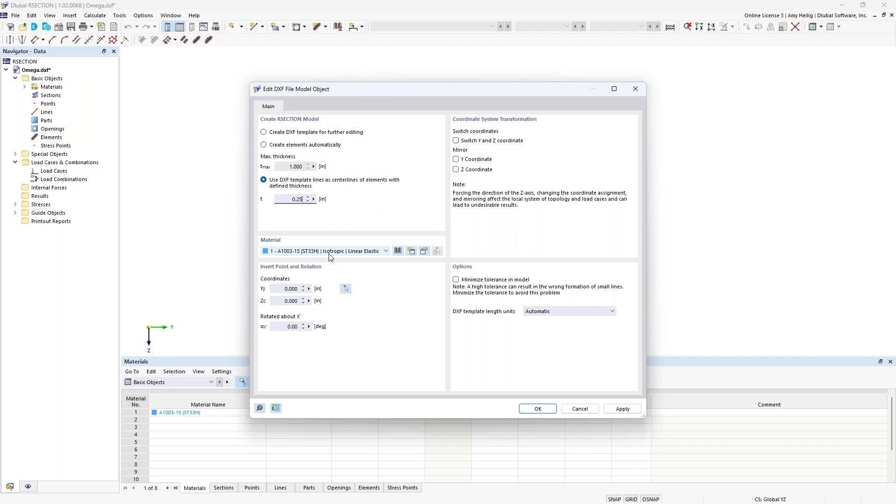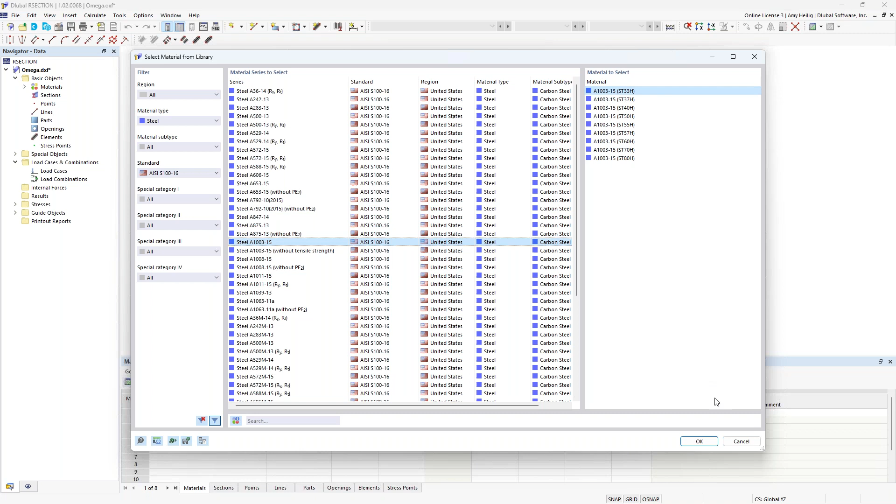We can visit our material library, and over on the left, we have the filters to utilize the steel dropdown and then the AISI S100. So here are all of the available materials for cold form steel. And notice that as we click through these different options, there are several subcategories as well. For this particular cross section, we'll go ahead and utilize the A1003-15 and the subcategory here of ST33H. So that material will then be set within this dropdown, and we can go ahead and click OK.

So once the import is done, we actually see everything automatically generated for this custom cross section. Now, I did want to point out that these are completely straight elements. We get a little bit better performance with the finite strip method with cold form steel sections when we just model directly these straight elements. It is possible to also model arcs at these corners where the elements join, but just know that the calculation time will be increased because of that. So ideally, it would be best to keep these as straight segments.

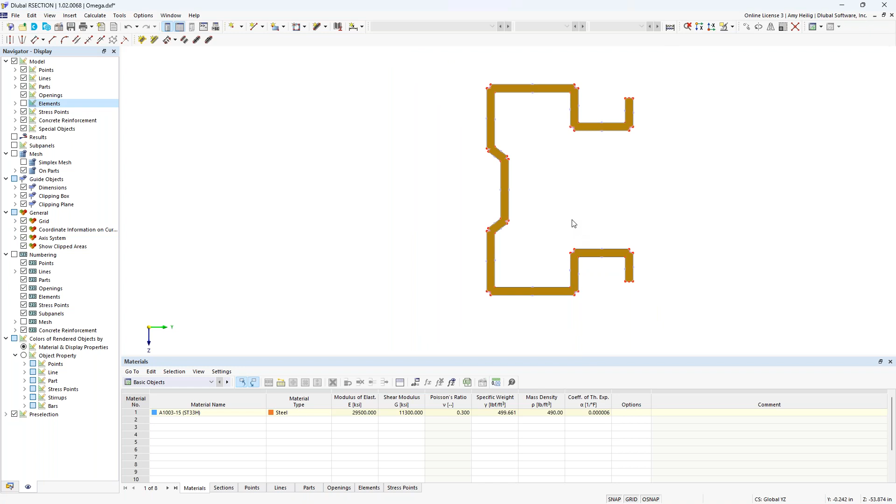Now, looking at the custom cross section here, we have a couple of elements that, again, were automatically generated. We'll start off with what we call the part. And the part is automatically created between the exterior boundary lines here of the cross section. Then on top of that, we have what we call the elements. And each one of these segments here is comprised of an element.

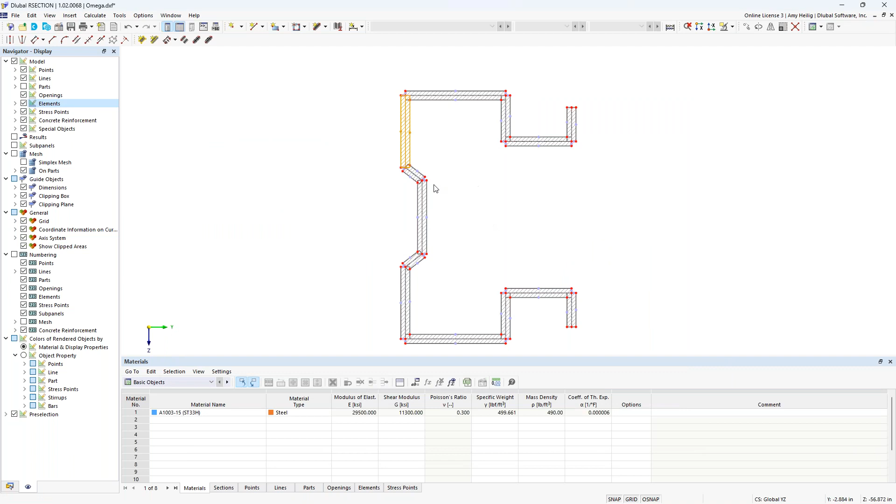We can right click to edit the element. And what you'll see here is that each of these has a particular thickness assigned to it as well as a length. And this information is important for the thin wall analysis and is required. So we would need both the parts and the elements.

So going back to the navigator here, I'm going to right click on the model name to access the base data. There are two analysis methods. The finite element analysis is set here by default, but this would be more so used for massive cross sections. Instead, we want to modify this to a thin-walled analysis.

Additionally, under the manufacturing type, we can set this to cold form. This will just be helpful once we bring this cross-section into RFEM that this data will already be set. When we click OK, we can simply go to calculate, calculate all, and immediately we'll see here that the cross-section properties are presented to us in table format.

So we have the area, for example, the moment of inertia, the section modulus, and this is the information that needs to be transferred to RFEM in order to understand the cross-section properties here of this section. Additionally, you'll notice the unit stresses are given here based on a 1 kip applied load, for example, for axial forces or maybe a bending moment. We can also view those stresses with the 1 kip foot applied to this cross-section.

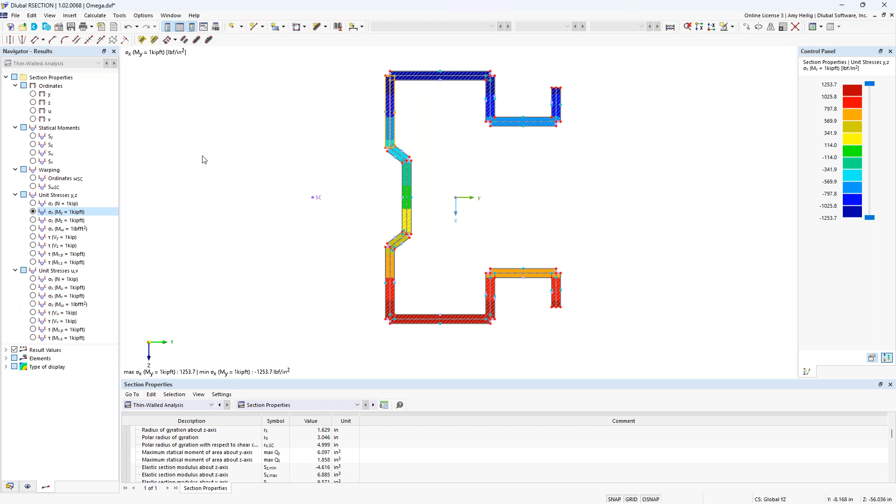So once we have the cross-section properties, we do want to save this to our computer. So in order to integrate in RFEM, we do have to have these saved cross-section properties from the calculation as well. And we will jump over to RFEM.

So beginning our cold form steel structure today, when we create a new model, we would give it a model name. The type of model would be set to 3D. And under this second tab, this is where we have our optional add-ons. So RFEM is the base program, and it's responsible for the modeling, the loading. We can integrate with BIM software, and it can run the full static analysis. So this means deformations, internal forces, support reactions. But if we want to take this a step further to actually carry out the design according to the AISI or the CSA S136, then we need to activate here the steel design add-on.

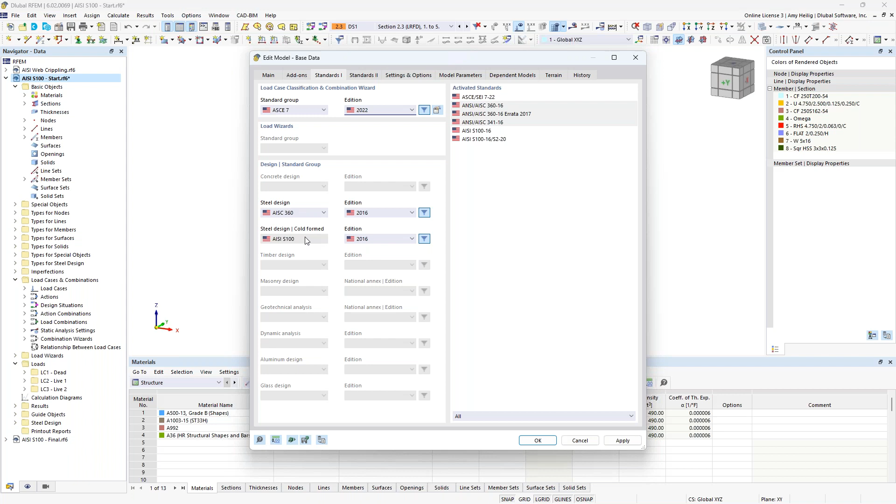Now under this third tab, this is where we set our standards. So we can see that we will generate our load combinations automatically according to the ASCE 7. We also have here the NBC. We have implemented the latest standard according to the 2022 for those load combinations. Then because the steel design add-on is active, we see here the AISC 360 is set for hot rolled steel, and we have the AISI set for cold form. Now, alternatively, if we were doing design in Canada, we could set this to the CSA S16, and we'll see the cold form update here to the CSA S136.

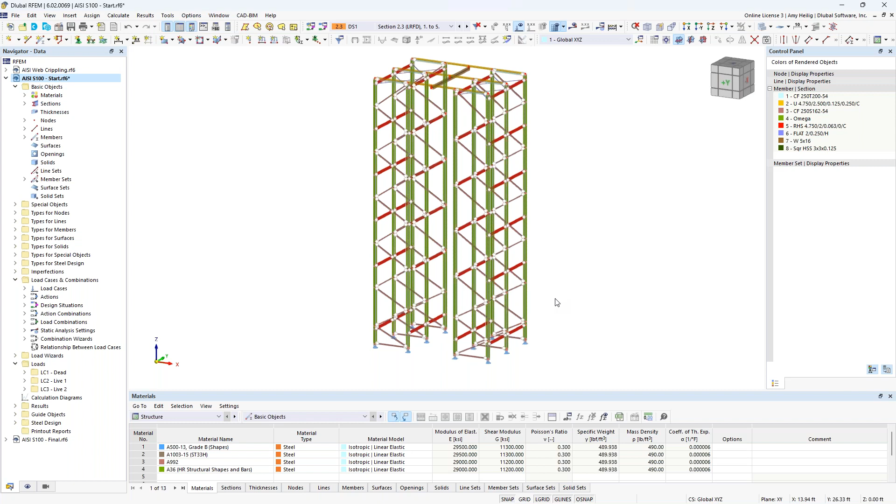So once this information is input, you can see here that for the sake of time, I have gone ahead and modeled our entire structure here. So this is some type of racking system maybe used for automatic storage and retrieval. Now we do have other webinars, tutorials that are dedicated to new users in the program where you can learn how to draw a beam, how to apply supports. So for the sake of time, again, we'll go ahead and just do a quick model review.

So over on the left in the navigator, we have here our various cross sections. So if I edit these cross sections so we can take a closer look, we'll see here the cold form steel sections applied to this particular model. So we have some channel sections, additional channel sections with stiffeners, and that custom cross section here was also brought in from RSECTION.

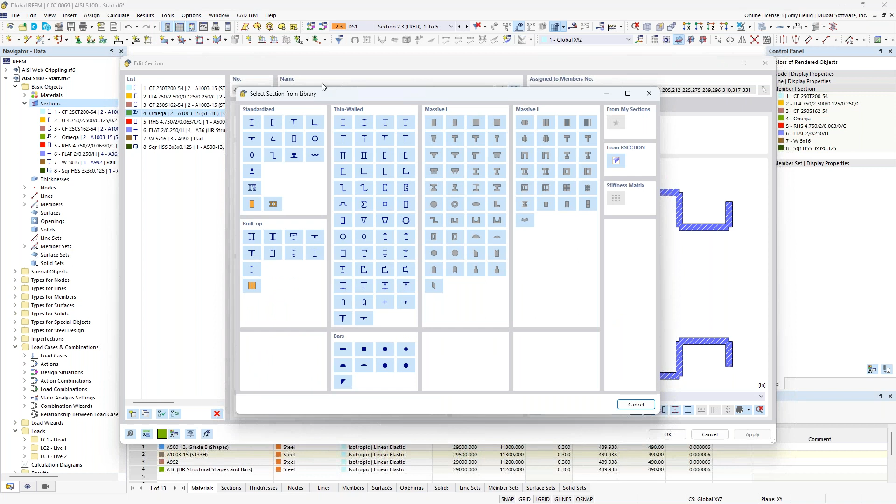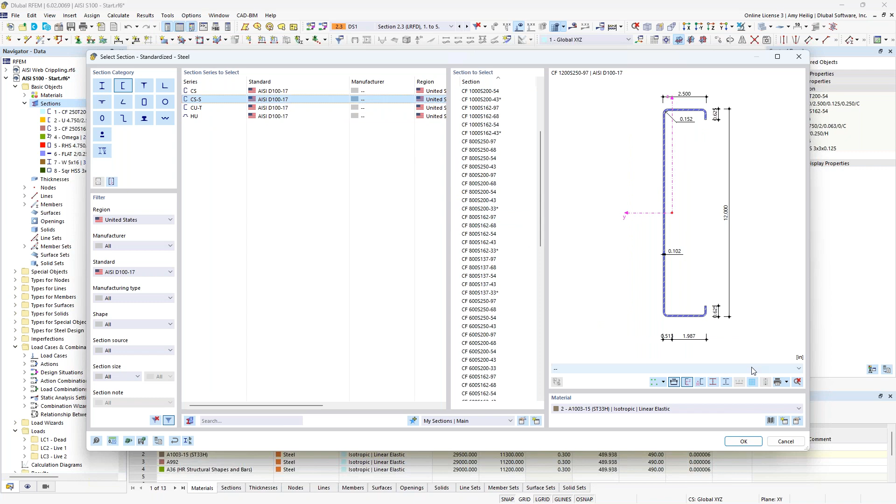When we look at our library database for our cross sections, if you want to choose a standardized section directly from the AISI, for example, if we take a look here at our channels, we'll utilize the filters once again on the left to filter to the United States, as well as the AISI D100, and we see the various channel cross sections, including hat cross sections, available to us here, again, directly from the AISI standard. Now, alternatively, if you have a parametric section that fits within the criteria listed here under thin-walled, you could simply input the dimensions and the custom cross-section properties will be automatically calculated in RFEM directly.

And then alternatively, we have the import here from RSECTION, and that's what we utilized for the shape here in the background. I just navigated once I clicked this option to that saved file from RSECTION on my computer, and we can bring this in like we would any other member.

So in addition to these cross sections, I have also assigned a material. So similar to our section, we can always visit the material database. Over on the left, we filter to steel, to the AISI, and once again, we have access to all of these various materials directly from the standard.

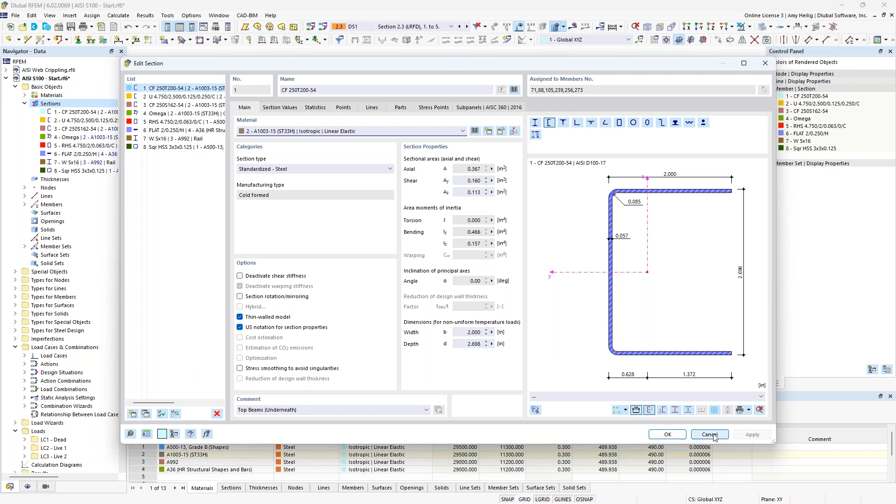So now that we have the cross sections and the materials covered here, we'll also see them within our navigator over on the left. When we take a look at that custom cross-section here for our column, and I'll zoom in, you'll notice that the program has actually rendered this true cross-section for me. And I'll go ahead and create a user-defined visibility here so we can see this in a bit more detail.

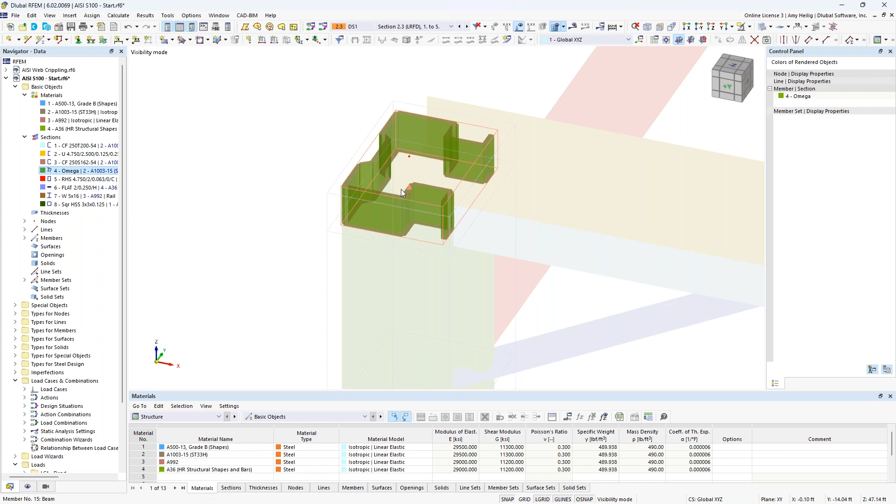So you'll also notice that for these columns, utilizing the custom cross-section, they were actually modeled in segments here. So each one of these is a separate segment. Now, there is possibility in the program to model this as one continuous column and just to keep this as one member and applying intermediate nodes along the length. But alternatively, if we do model this in separate segments, it's entirely possible to create what we call a member set. So we do this by selecting multiple segments.

We can right click, and under the members option, we have here what's called create member set. So that's what you'll notice here over in my navigator, that the program has grouped together these columns. And this will come into play a little bit later on with topics like notional loads, but also the design. Again, wanting to design this as one continuous member rather than those multiple segments.

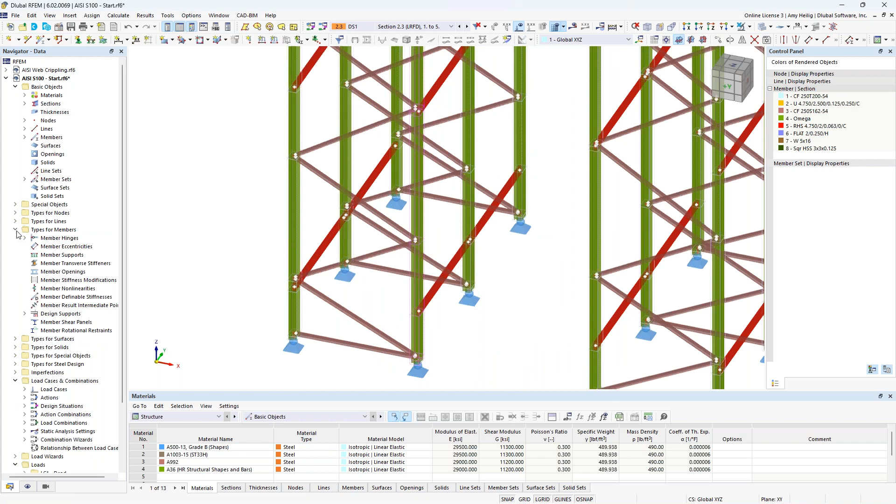You'll also see graphically the member hinges applied with the symbol shown at the member ends. So if we take a look at the types for members, we see here our various member hinges, and the member fixity all depends on how these cross sections or these members are connected to one another. So with cold form steel, it's quite typical to connect them with screws. And I have several different definitions here, just depending on what that connection is.

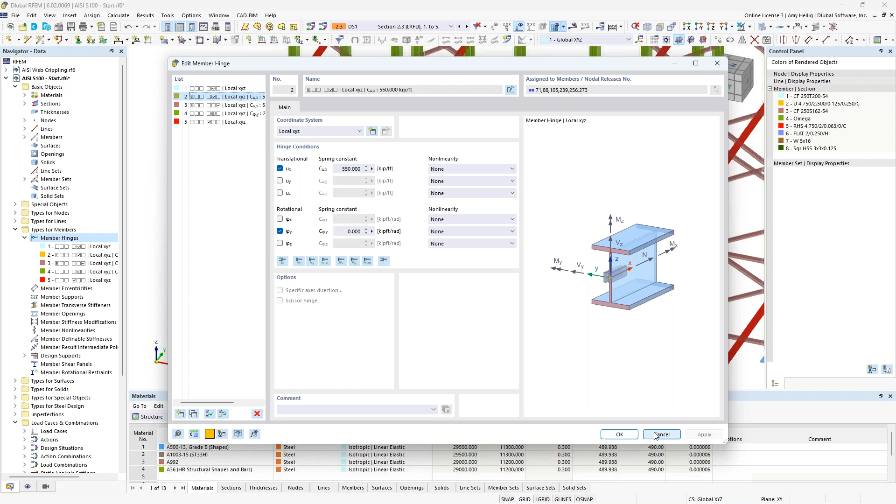So we have our 6 degrees of freedom. These are all based on the local axes of the member itself. You'll notice that for some of these, I've applied a spring constant. So something that's not fully fixed, not fully released, but somewhere in between. So within this model, we can take a look at the different hinges applied. They're probably a little difficult for you guys to see, but as I click through these, they are highlighted in the model depending on which member they are applied to.

And finally, we have our nodal supports down here at the bottom, which were applied just utilizing the tool up here in our toolbar. And these are also a bit special in the sense that initially they just look like standard pin connections, which you'll see under this definition type that we again have 6 degrees of freedom, but these are based on the global axes here, shown here in the background.

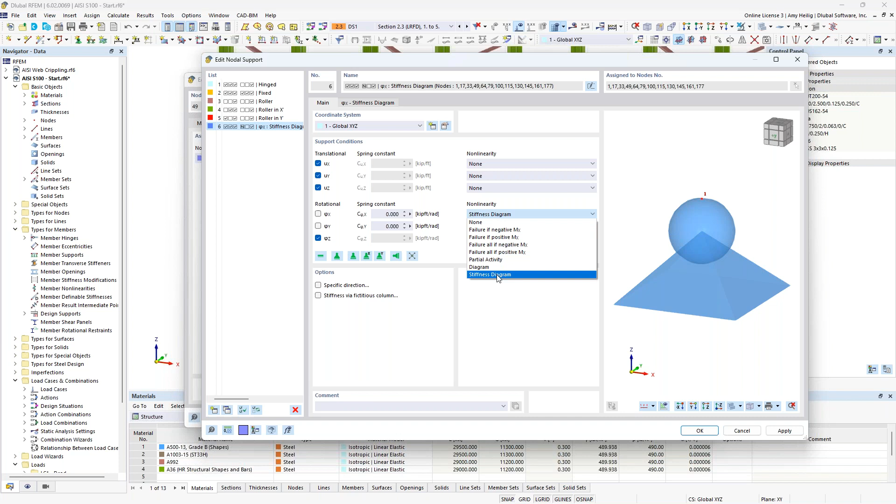So I've restrained the translation for this pin support, including the rotation about the global z-axis, but I've also applied a rotational nonlinearity. So this is within the rotation about the global x-axis, and under the nonlinearity options, I've applied a stiffness diagram. And we now get a new tab here where we can define this information. So you'll notice that I've set this so that the rotational stiffness is dependent on the contact pressure or the downward force for these nodal supports.

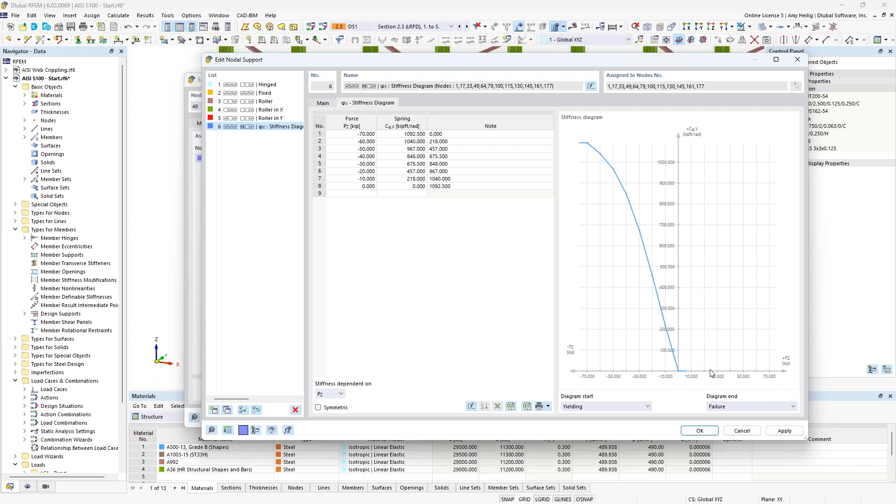So as the contact force increases here, we'll see a greater spring constant, and then in uplift, we'll see that support fully fail for rotation about the global x-axis. So entirely possible here to consider more complex scenarios for our nodal supports as well. So now that we have a basic understanding of the various members within the model as well as our supports, let us move on to loading.

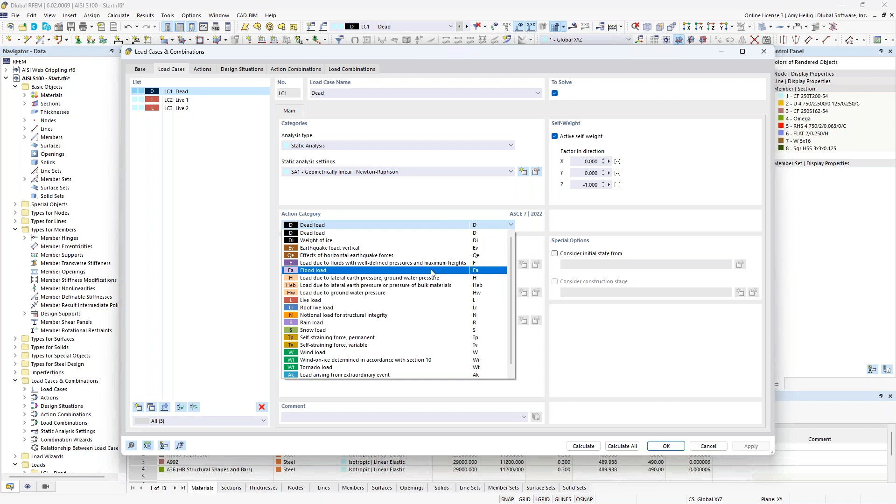So I have here 3 simple load cases that we can access in our load cases and combinations dialog box. So we have the first load case, which is dead load, and you'll notice that self weight is active here, and the action category is also set, which is just dependent on the ASCE 7, because remember back in the base data, this is the standard we're using to generate our load combinations. We can revisit that information here under our base tab, where we'll see the availability to change that standard if we'd like.

The second load case is a live load. So action category set to live, self weight is turned off here. And finally, another simple load case, live load 2 with the action category set to live. So once these load cases are set up, we would need to actually apply the loads to the structure. So we'll begin here with the display of our dead load. So you'll see that I actually didn't apply any additional loads to this load case. We're only accounting for self-weight automatically under the hood for that particular load case.

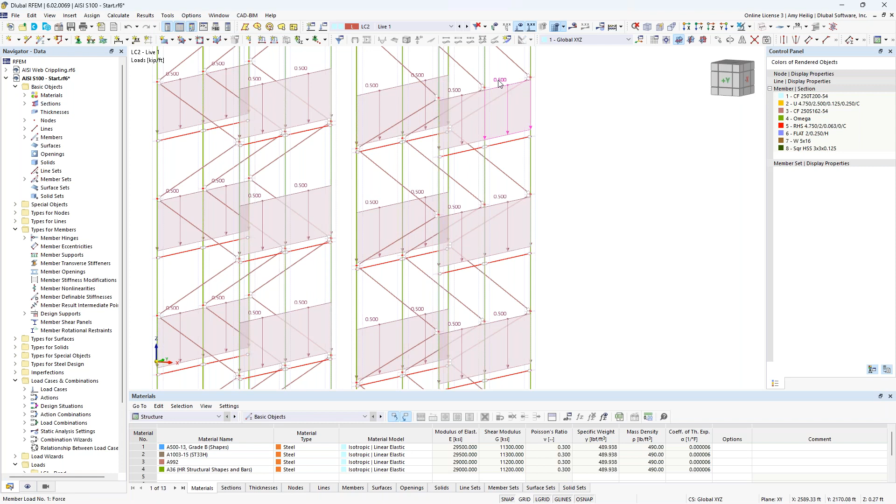Now looking at our live load 1, we see here, and I'll turn this into wireframe view, that we have the member load applied here at our beams, which are spanning between the columns. And a member load can be applied up here in the toolbar. But there is something a bit special about this particular member load. If I double click on it here, we'll see that it's just a standard downward uniform load of -0.5 kips per foot, but we have the ability to consider an eccentricity on the loading.

So when I turn this checkbox on, I get the additional tab up here at the top. Now the default behavior for a load is typically applied at the center of gravity or possibly the shear center. But alternatively, we can move that load application up here to the top center point so that perhaps we want to account for some additional torsion within the member for the design, or we can do so directly within the force eccentricity.

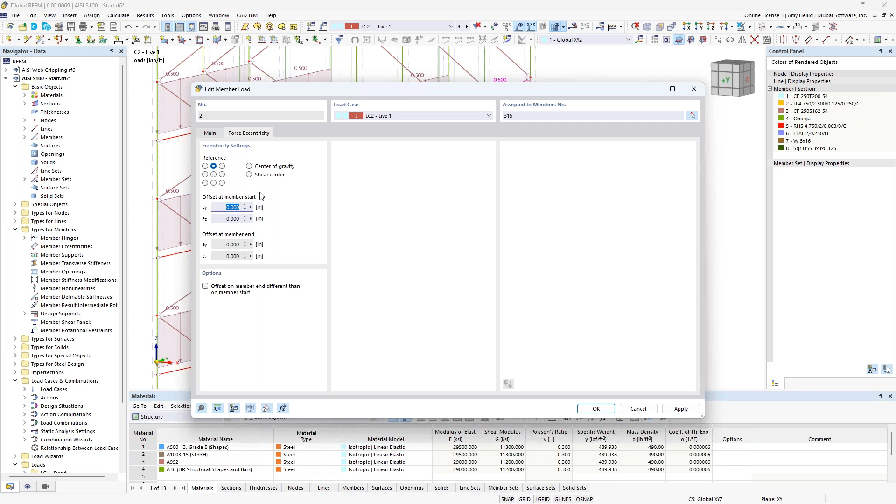So in addition to this first live load, we also have this second live load, and this is also a very simple application with a single nodal load applied up here to our center beam. So this load is just essentially introducing those horizontal forces to the entire racking structure. That nodal load can also be applied up here in our toolbar.

So going back to our load cases and combinations, now that we've generated those load cases, let's take a look at the design situations. So the program has automatically created 2 design situations for us, our LRFD design situation and ASD design situation. Again, these come directly from the ASCE 7, and it's nothing more than just grouping together our factored load combinations for the first design situation and our unfactored load combinations for the second design situation.

We can always click on this little info button here, which will pull that information directly from the standard of what we're referencing. Design situations are absolutely needed when it comes to carrying out the design within the steel design add-on that we activated. So that's why you'll notice that these are by default checked on here for that particular add-on.

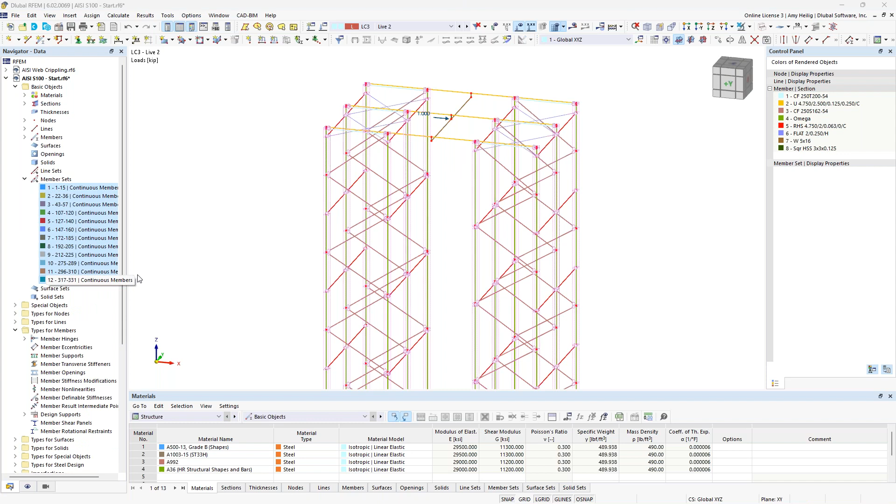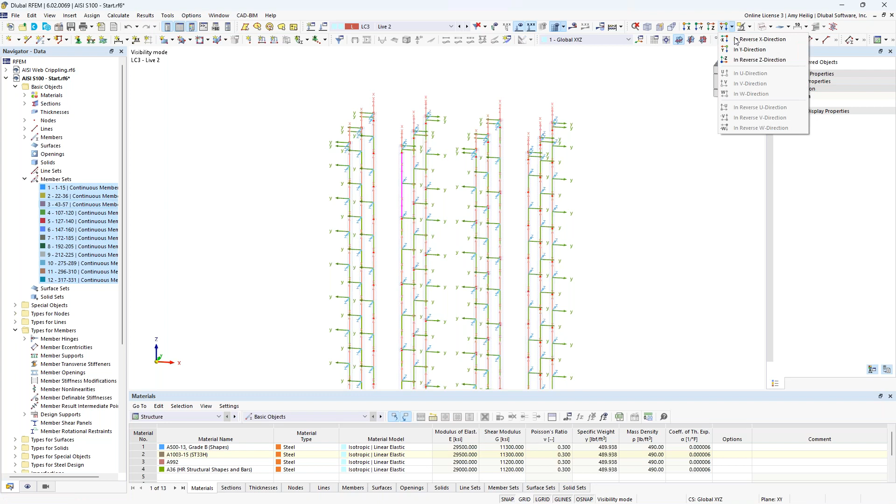So I'll begin by creating a user-defined view here for only my member sets. So we'll go up here to our toolbar and create that user-defined view. I'll go ahead and turn off the hidden objects in the background. Now, additionally, when we create our imperfections or our notional loads, these do depend on the local axis system. So if I right click, I can turn on the local axis system of all of these columns. So we'll take a look at the elevation view here.

Now, the imperfections are going to be available under our navigator here under the imperfections table. So we right click to create a new imperfection case. Now, again, the imperfection directions or the case all depends on which direction you want to apply them in your model.

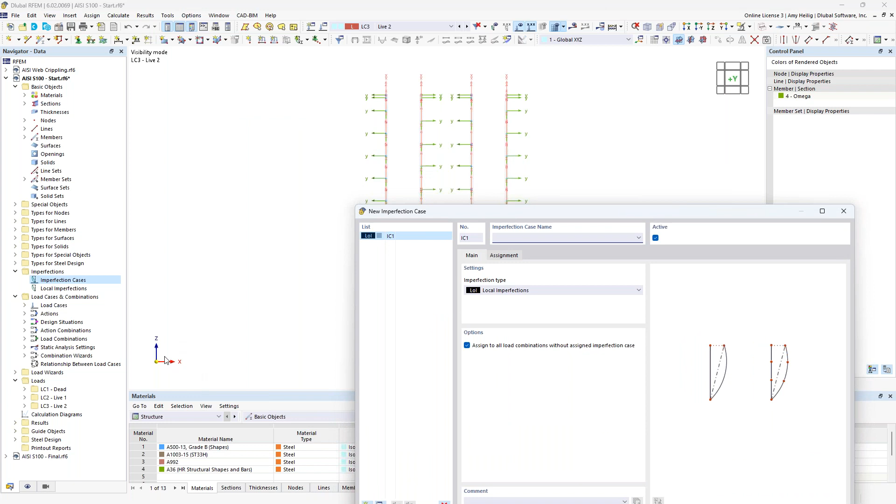For our case today, I'm going to create two simple imperfection cases, one in the global positive X direction and one in the global positive Y direction, or into the page here. Therefore, I need two imperfection cases. So we'll begin with imperfection in the X, and then I simply make a copy of this and I'll create my second case, imperfection in the Y.

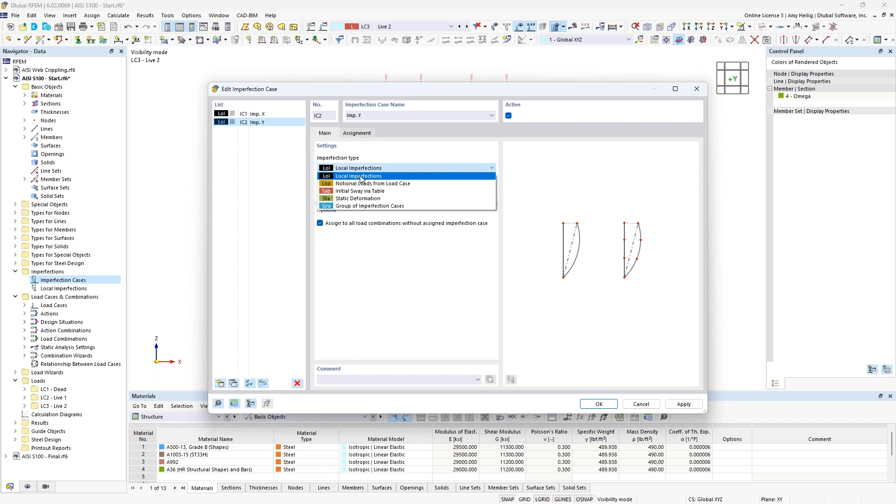Now, the imperfection type within this dropdown will be set to local imperfection. And under the assignment tab, there is the ability to assign specific imperfections or notional loads to specific load cases. Alternatively, though, we can just apply it to all of our load combinations, which is what we'll be doing today. So now that these imperfection cases are generated, we need to actually apply the notional loads to the structure. So now you'll see here under our imperfections folder these two imperfection cases.

Now we can apply according to each individual member, or we have the ability to apply to a member set. And because these columns are individual segments and I created member sets to group them together as one continuous member, we will want to right click here to create a new member set imperfection. So within this dialog box, we use our drop down to directly select the AISI S100. And this is going to reference equation C1.112-1 directly from the code. So this should look familiar if we look that up within the code.

So more or less, we are just applying a deflection here at the top of our columns, but the deflection magnitude all depends on the axial force applied to the member. So this is an iterative calculation that the program will automatically apply for us based on the axial forces under each load combination. The imperfection is applied according to the member's local axes.

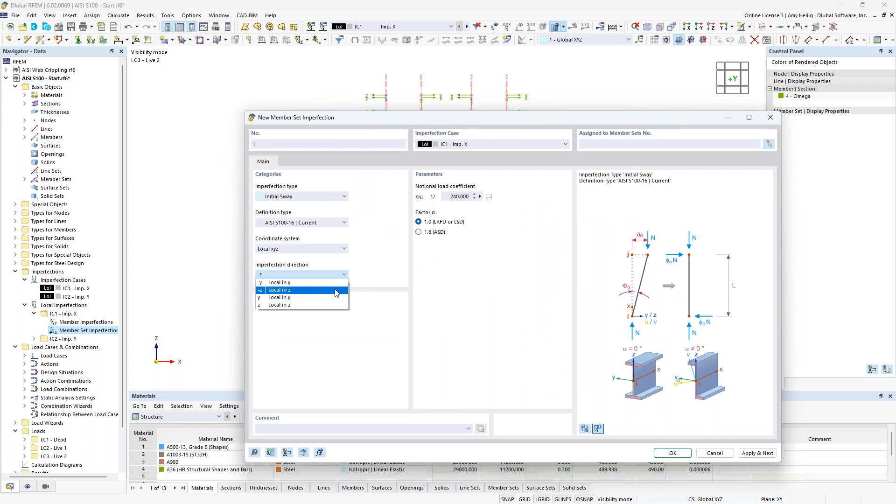So for our case today, this first imperfection in the X direction, we want to apply this based on the negative Y axes. And I'm going to select here my member sets in the first row and the third row. And we might be wondering, why are the local axes different here for the different member sets? That's because in rows 1 and 3, I have the members rotated at 90 degrees, and at rows 2 and 4, they're rotated at negative 90 degrees. So inevitably, this affects our local axes orientation, which is why we need to take a two-step approach here for the imperfection direction.

So now that I've applied it to those particular member sets, I can click Apply and Next to remain within this dialog box and simply modify my imperfection direction to the positive Y local axes. I'll select these graphically as rows 2 and 4. I click OK, and I click OK once again. Now, if we display our notional loads, or imperfections, we see that column out of plumbness applied, again, referencing the AISI, to our member sets or our columns directly.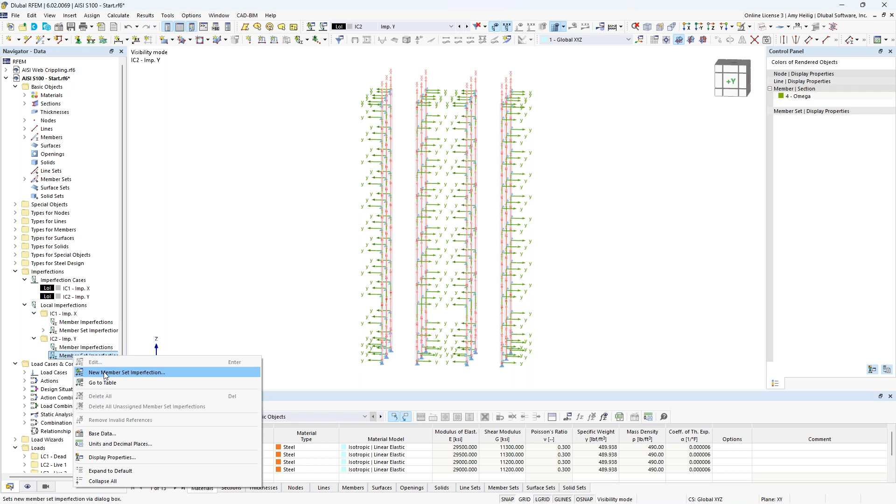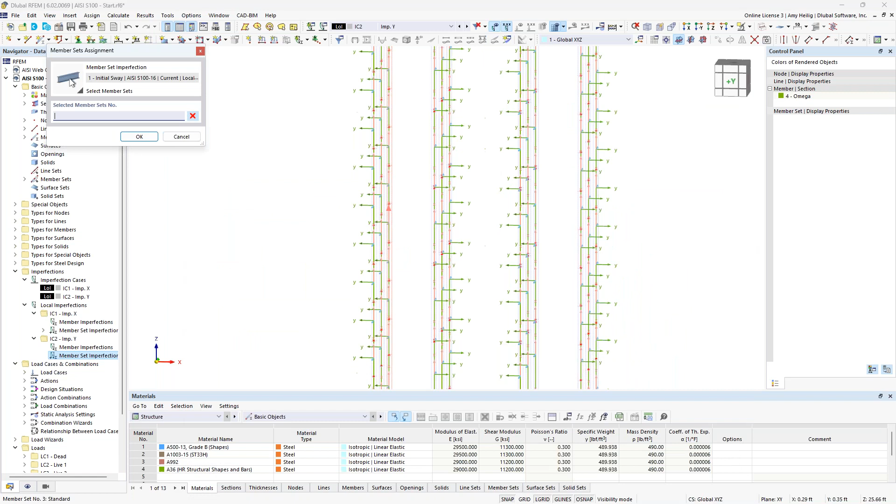We're going to do the exact same approach here for imperfections in the Y direction. So we go back to our navigator to right click to create a new member set imperfection, this time under the imperfection Y case. We'll select the definition type directly as the AISI S100 once again. The imperfection direction this time is going to be in the negative z-axis, and I will zoom in here to select the member sets in the first row and the third row. I click OK, apply and next, and then we simply modify this to the positive local z-axis to select our member sets in rows 2 and 4.

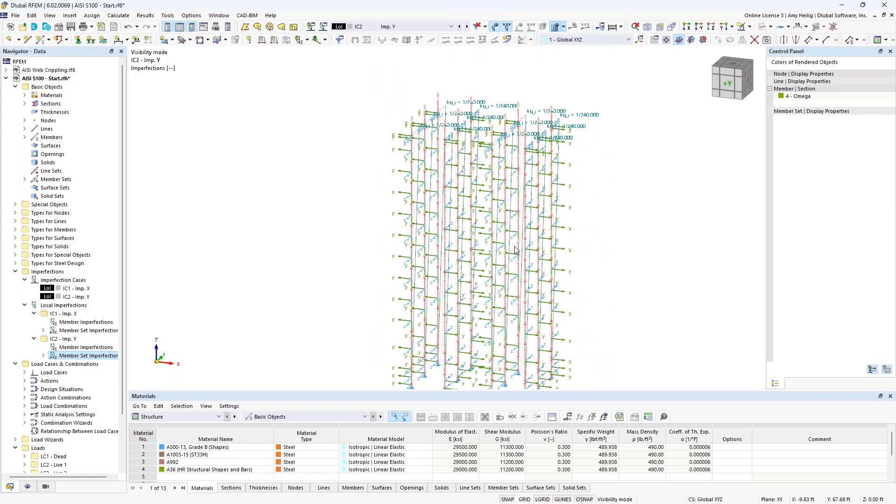I click OK through these dialog boxes, and now we should see this column out of plumbness, and I'll right click here to turn off the local axis system, applied in the global Y direction. So this is how we can directly account for those imperfections based on the code requirements. Now that we have applied the imperfections in these various cases, we need to combine them into the actual load combinations.

So I'll drop down here to my dead load, and this will allow me to access the load cases and combinations dialog box. And under the design situation where we had previously set the second order analysis, you'll notice that we have a checkbox to consider the imperfection cases that is turned on by default. So for my factored load combinations, those imperfections will automatically be added to the existing load cases as well. Now, the problem is that I want to carry out LRFD design today for my cold form steel structure, but I'm using my ASD design situation for my serviceability or deflection checks.

Therefore, I don't want to consider my imperfections for this second design situation. Well, it's easy enough to create a copy of this existing definition type. And within this copy, I just simply turn off the imperfection cases. So now going back into my main dialog box for my factored load combinations, we'll keep this as definition number 1. But for my unfactored load combinations, we're going to drop down and select the third option here where we

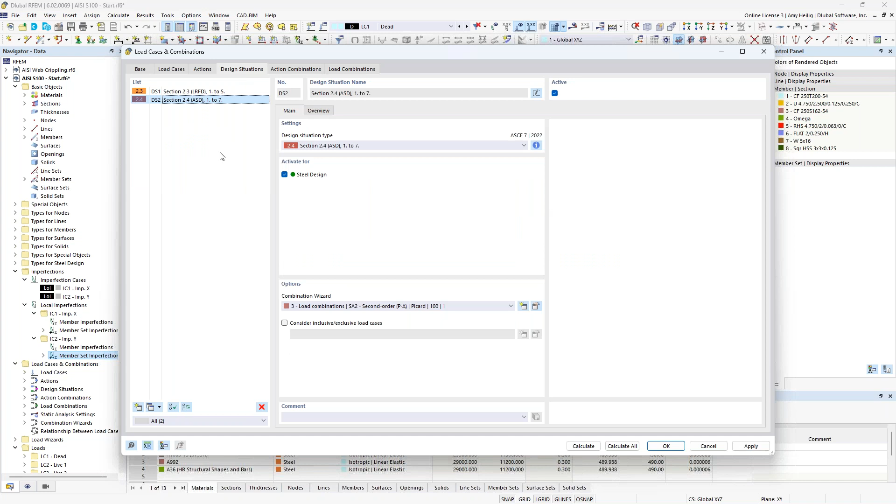The final topic, according to the direct analysis method, is stiffness reduction, and this is given in section C1.1.1.3. We reduce this stiffness to account for inelasticity effects as well as cross-section deformations. So in order to take into consideration the stiffness reduction, we are once again going to go in here to our combination wizard settings. And this option is actually controlled directly here with a new structure modification. So we create a new definition type, and we're going to be applying this to our members. When we turn this on, we get an additional tab here, where under the member modification, we can use our dropdown to create a new member stiffness modification.

Now, very similar to what we saw with our imperfections or our notional loads, we also have the AISI S100 available in this dropdown. So this will reference the code directly and the particular equations given here to iteratively calculate this tau sub b factor that will be applied to the flexural stiffness for each member. And again, this is very similar to what we see within the AISC. Now we also have an additional factor here of 0.9 that's applied to both the flexural and the axial stiffness. Now a difference here from the AISC is that within the AISI, this is 0.9, but within the hot rolled steel standard, this is 0.8. So that is one difference that you'll see here.

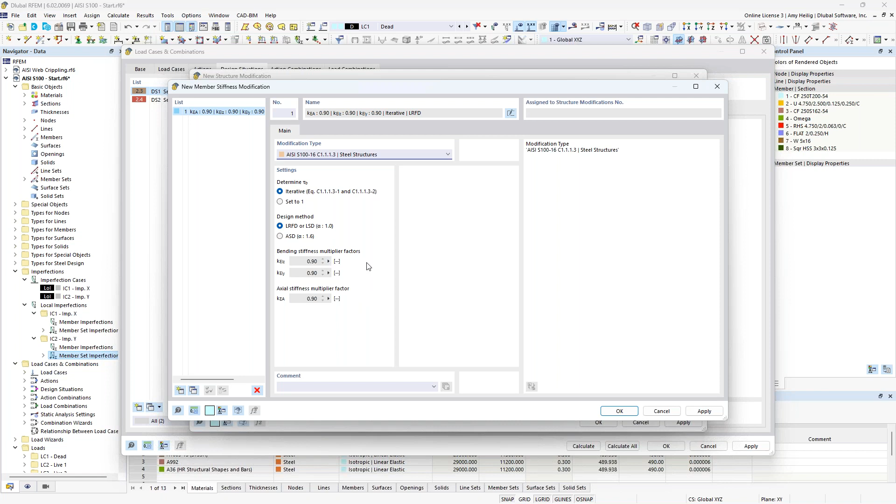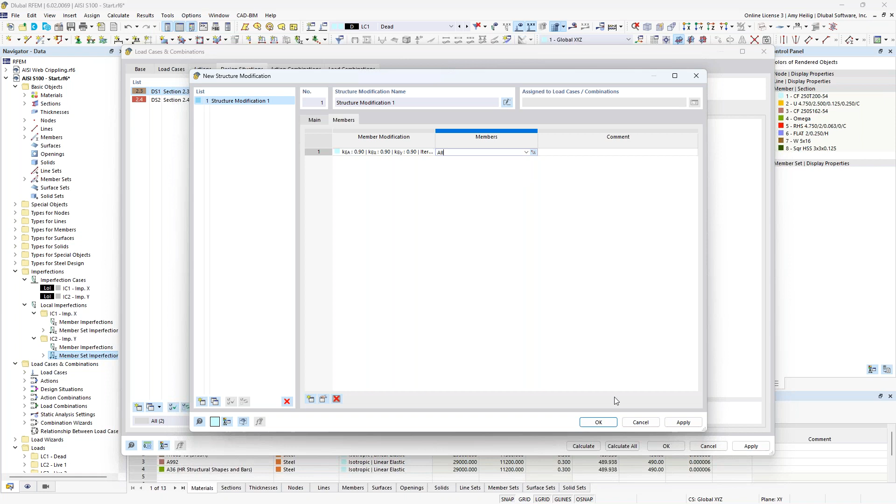Now, the code says to apply this stiffness reduction, once we have defined this, to all members that contribute to the lateral stability. So we certainly could use this option here to graphically select those members, or we could input the member numbers. Now, alternatively, we can just apply the stiffness reduction to all members. The code goes on to tell us that this is also possible. So if we use our drop-down box for all, we'll now apply those stiffness reductions to all cold formed steel members within this model. But yet again, I only want to consider this for my strength design, which will be carried out with this LRFD design situation. For my unfactored load combinations, I do not want to reduce the stiffness, so I simply leave this unchecked here.

So once again, we'll go back to the load combinations to check this out in more detail. And sure enough, for each factored load combination, we see the additional setting here to reduce the stiffness. But if we jump down to our unfactored load combinations, this option is turned off.

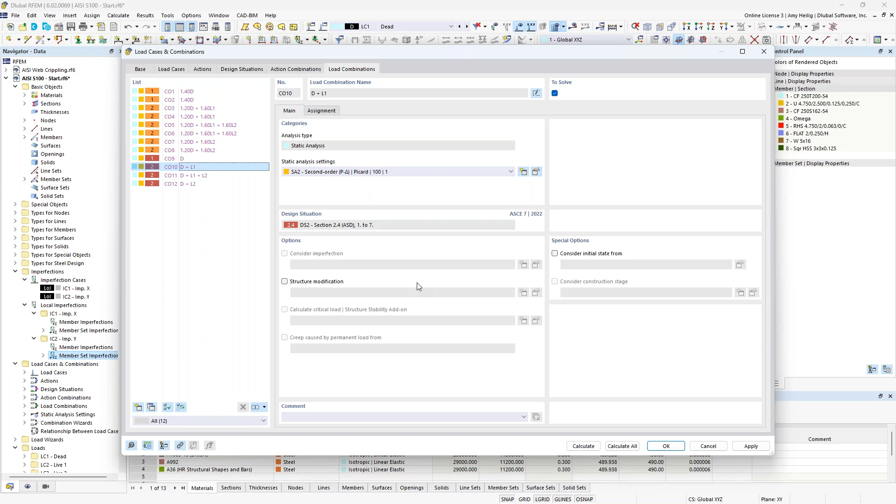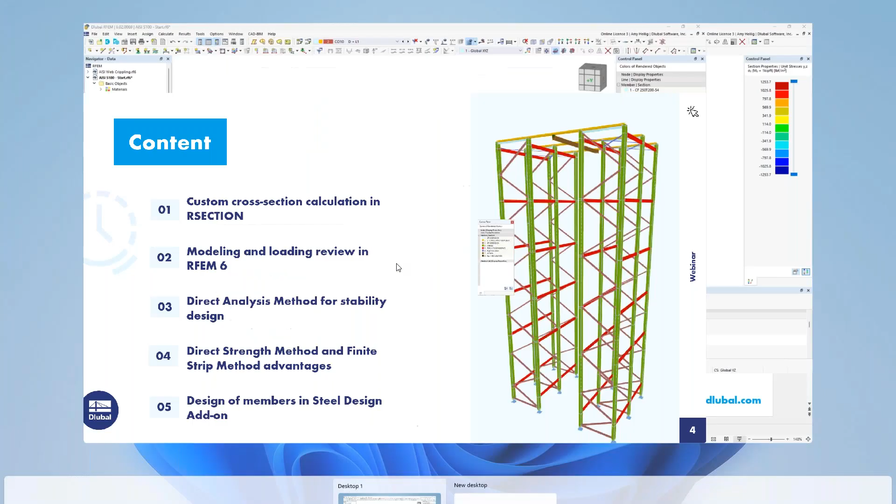Okay, so now that we have fulfilled the direct analysis method requirements, we're technically ready to run the full analysis. But the huge benefit of RFEM 6 is this better integration of these add-ons for the design within the main program. So we'll go ahead and continue on with some of the design input information specific to the AISI to carry out that workflow. For this, I'm going to go back to the PowerPoint here because I do want to talk in a bit more detail about the member buckling behavior. Very important topic when we're talking about these very thin-walled cross sections.

Now, additionally, we also have global buckling to consider, and this is lateral bending of the entire member, and we typically think of this with flexural torsional, or lateral torsional buckling. Now for this, we'll see one long half wavelength, which is always dependent on the unbraced lengths for these particular buckling modes.

And finally, a bit more unique to cold formed steel is distortional buckling. So this is more or less a combination of local and global failures, where we have some translation at the fold lines, but also the half wavelength is somewhere between what we see for local versus global.

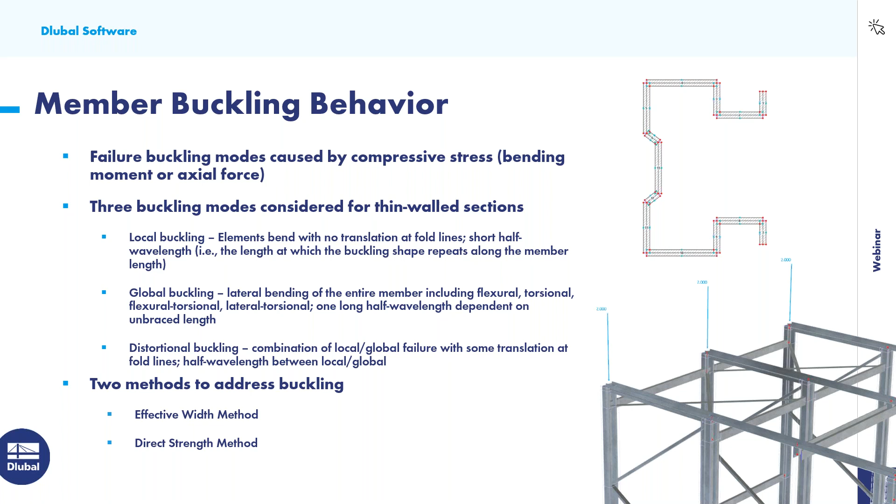Now, there are 2 methods throughout the AISI to address buckling. The first is the effective width method, and the second is the direct strength method. So going to our next slide here, let us talk a little bit more about the effective width method versus the direct strength method, and maybe some advantages here that we have.

So the effective width method essentially will consider each individual element here. So again, these elements are what comprises our cross section. And an effective section calculation is required for each one of these elements. And we really don't have any interaction between these elements for the overall member or section behavior.

Now, alternatively, when we turn to the direct strength method, and this is going to be the method that RFEM is going to utilize, this has definitely some advantages in the fact that no effective width calculation is required for each one of these individual elements. There's no iterations required, but rather the gross cross-sectional properties are used for the entire section.

We also have the interaction of all elements for all stability limit states because we're not considering, again, these individual elements, but rather the full cross-section itself. We also have compatibility and equilibrium maintained at the element junctures. So where these elements connect is specific to the direct strength method, whereas with the effective width method, they more or less are not accounted for.

Direct strength method is also applicable to a broad range of sections. We might see more limitations when we talk about the effective width method and which cross sections it can be applied to. Direct strength method, we really do have a lot more freedom here to apply this to pretty much any custom cross section as well.

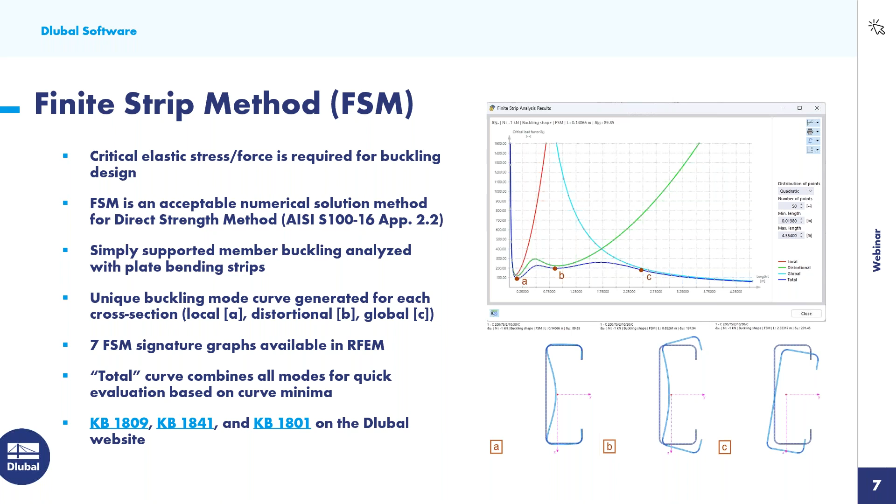Now, this is certainly a very interesting and complex topic, so I would refer you here to some knowledge-based articles that we have directly on our website that explain the finite strip method in more detail. It directly references the AISI. Those hyperlinks are included in the PowerPoint handout that you can access within the GoToWebinar to see those on our website in more detail.

Okay, so what we will do now is to go back to the RFEM model, and I'm going to revisit the cross sections here. So looking at the various cross sections, we'll immediately jump down to that custom cross section, our Omega section in particular. If we use our drop down over on the right, here are those 7 unique graphs that I just mentioned for the finite strip method. And these are all based on the applied unit load.

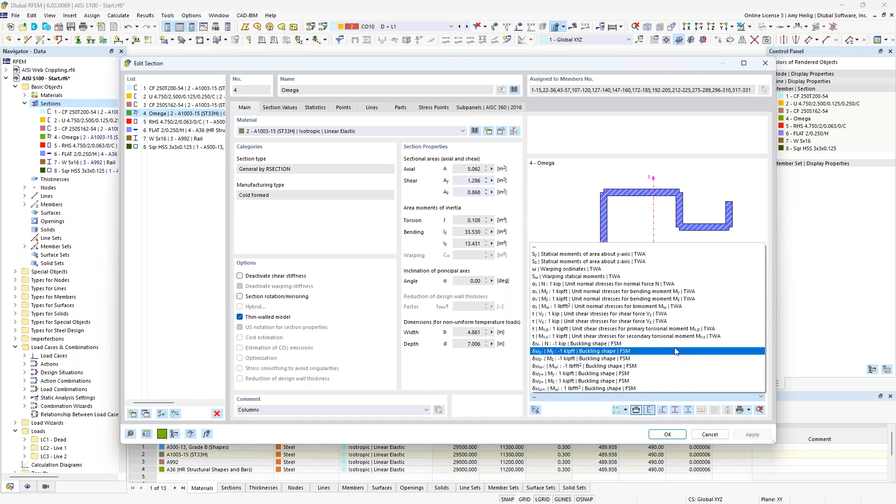So if we take a look at 1 kip axial force, what we will see is that finite strip method plot, again, referencing that PowerPoint. And this currently is showing the total curve. But additionally, what we can do here is to plot the local curve by selecting it within this dropdown. And we see that appear over here on the left-hand side with the red curve.

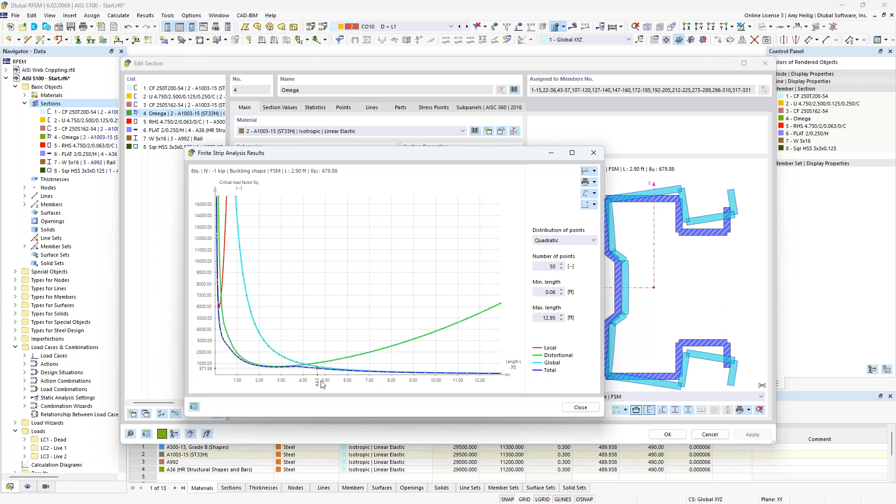We can also display the distortional curve. And finally, we can display the global curve. And ultimately, that total curve is going to consider all 3 of these, again, for just a quick evaluation here based on the curve minima along the length. So this is what's happening underneath the hood for every single cross section, again, even if it's a custom cross section.

So now that we have a better understanding of the direct strength method, finite strip method, we'll go ahead and take a look at global buckling now in a bit more detail with effective length definition. So when we design our members, we need to input information such as unbraced lengths.

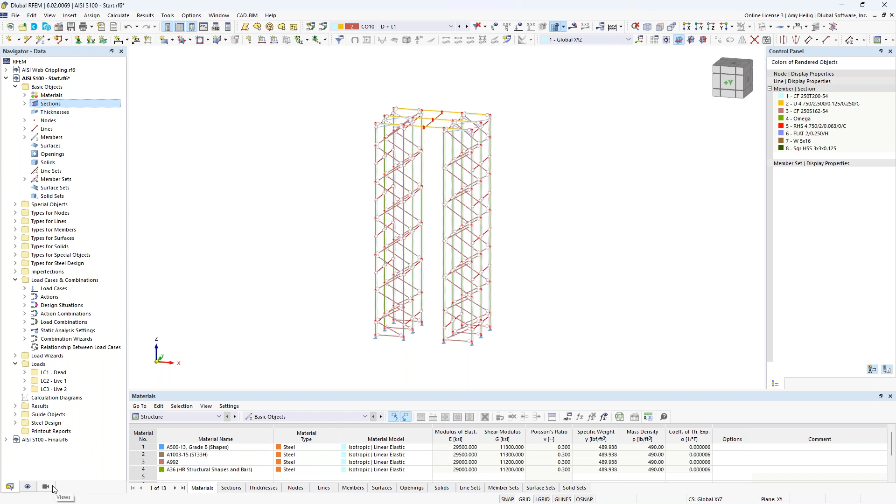We'll begin here with activating only my rectangular HSS section. So let me go ahead and show the rendered view of this so you can understand exactly where these cross sections are. So these rectangular sections are spanning in between my columns. And we'll begin with the effective length definition for these particular members.

So we highlight them all, we double click, and what you'll notice is that the design properties here is turned off. This is telling the program that I'm not interested in carrying out the actual design according to AISI. Rather, I only want to carry out the analysis. When we turn on the design properties, this is going to reference the Steel Design add-on, and we get additional tabs here up at the top. So this is all information that is specific only for the design.

Under the design types, we have here the effective length definition. So let us go ahead and access a new effective length definition. And you'll see here I can modify my view within this dialog box so we can see those HSS members spanning between the columns. We immediately want to change this to the effective length definition according to AISI S100 for these rectangular hollow sections.

Then you'll notice that for global buckling, we have here 4 considerations: flexural buckling, strong and weak axis, torsional buckling, lateral torsional buckling. We also have the ability here to determine the elastic critical stress according to the finite strip method or according to chapter E2 F2.1. So this is a really important topic. So I'm going to jump back again to the PowerPoint here to explain in a little bit more detail.

So you'll notice within this dialog box, as I just showed you, that we have 2 options here to determine the elastic critical stress. The first option being the finite strip method or the numerical method. And this is going to be applied then for local, distortional and global elastic buckling failures. But it should be known that if we do choose the finite strip method, flexural and torsional stability failure modes are always grouped together for the global buckling. And this is regardless if we uncheck one of these options.

So if I am thinking, okay, my member is fully restrained against torsional buckling, but I'm still concerned with flexural buckling, so I fully uncheck this option, the program doesn't care. It still sees these grouped together because we're referencing the finite strip method graph. So this is purely a limitation of how these graphs are created, that flexural and torsional buckling are always grouped together.

Now, alternatively, if we leave these checked, but we have varying effective lengths or unbraced lengths for flexural versus torsional, again, because these are grouped together, we are always going to take the longest effective length. So if we would like to set a smaller length for torsional buckling versus flexural, the program just groups them together for those particular global stability checks and will reference the longest effective length. So just keep that in mind with the finite strip method with the global buckling.

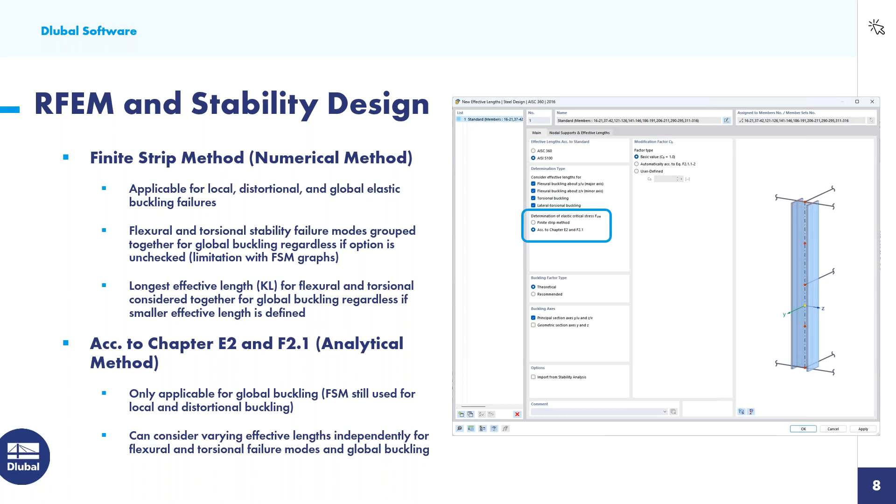Okay, so now that we have a better understanding here of what these various settings are, for my particular example today, when we have something like a tube section, we're really not interested in torsional buckling or lateral torsional buckling. And because I'm unchecking this, I'm going to utilize the analytical method here, because remember, the finite strip method would not detect the torsional buckling being unchecked. The program would give you a small warning, just letting you know that, hey, we see that you unchecked one, but we really can't consider it. So we'll utilize the analytical method.

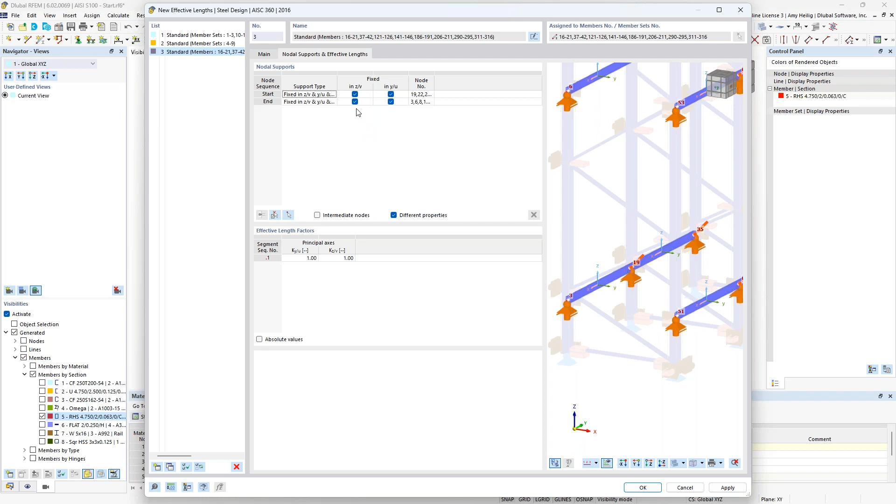Under this second tab, this is where we apply our intermediate supports, and you can see the program automatically will apply these at the member ends, and we will be fixed for flexural buckling in the strong axis as well as the weak axis. So that effective length, KL, will automatically be calculated for all of these members shown here.

So once we are done with the effective length input, we also have the ability to apply a local section reduction. Just keep this in mind that this is only for the tension design according to the AISI. We do not carry out any equations at this point in time for cold form steel considering holes. So everything is considered without holes.

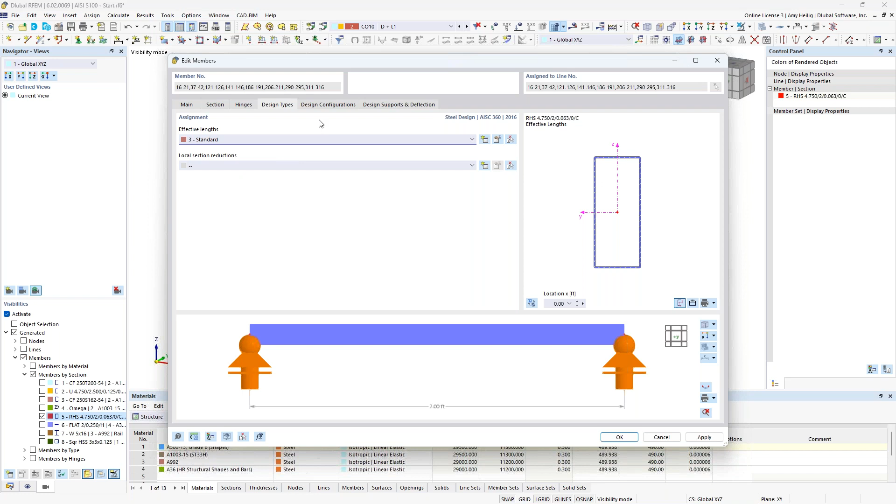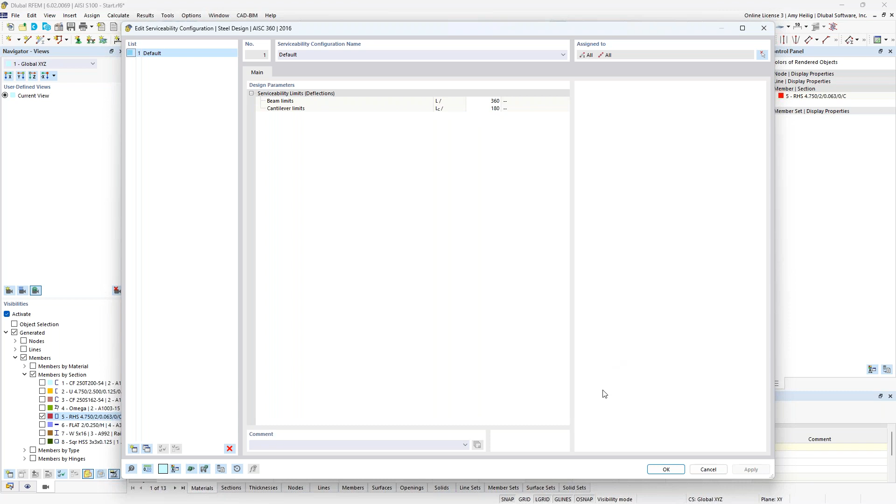Under the design configuration, we have here our strength configuration. So we take a look at the default settings here, just some various settings that we have put in the code references directly for alternative equations. So you could certainly take a look at here and make those modifications if you'd like. Under serviceability, this is just simply where we set our limiting deflection ratio for our deflection checks. So for simply supported members, we will reference this L/360, and for cantilevers, we'll reference L/180, but of course you can make modifications to this design ratio here.

And finally, we have the design supports and deflection. If I do absolutely nothing within this dialog box, the program automatically assumes that it's supported at either end. Therefore, we're going to reference the L/360 limiting deflection ratio. For our case today, we'll go ahead and leave this as default and not make any further modifications here. So now that this information is complete for these rectangular sections, I'll go ahead and cancel out my visibility here.

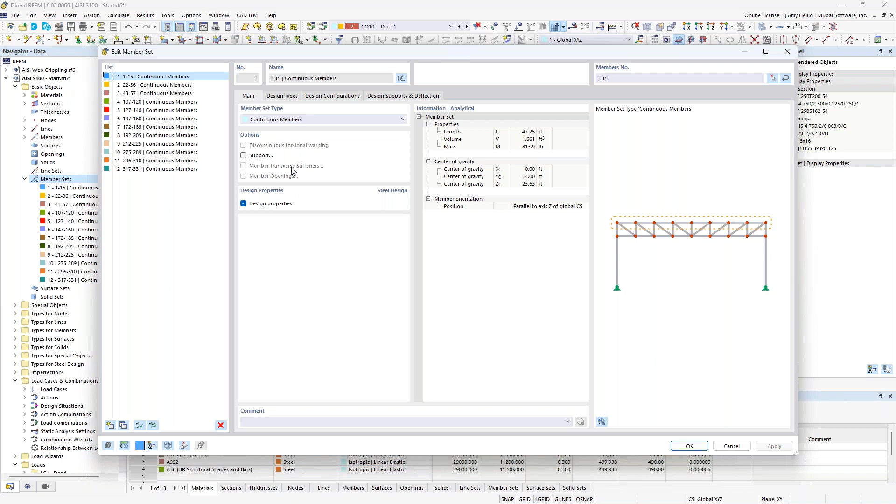I also have carried out the same workflow for my member sets. So remember, I want to design these columns as one continuous member. So rather than going into the individual member settings, we can come in here to our member sets. And what you'll notice within this dialog box is that this also has a design properties checkbox. So when this is turned on, we have some additional settings up here at the top within these tabs that look identical to what we just covered.

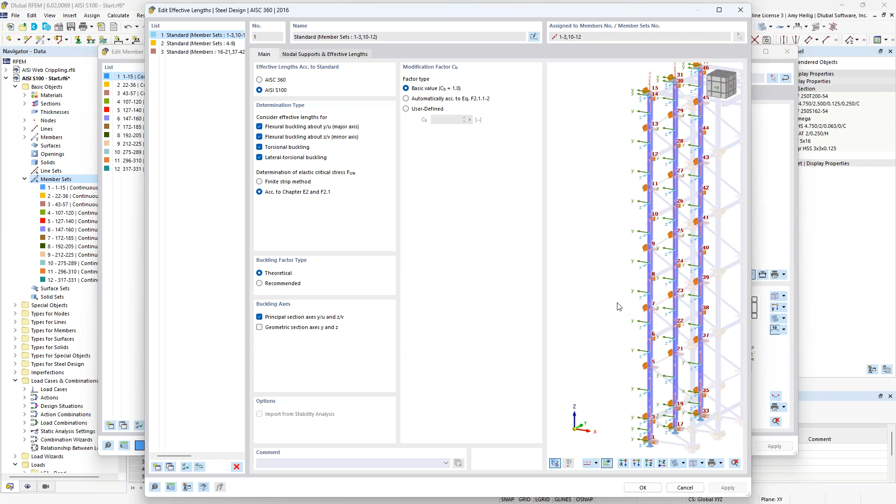Now, because this column is certainly much more complex, I went ahead and defined the effective length already here. So you can see that I have flexural, torsional, lateral torsional buckling all considered. I'll go ahead and change around my view here so we can see exactly which members we are looking at. I am referencing the analytical method here because I have some different unbraced lengths for torsional buckling versus flexural buckling.

Now we have the ability to detect these intermediate nodes along the entire length, and notice that there are 4 degrees of freedom. This just all affects the effective length definition here for flexural buckling in the strong axis, flexural buckling in the weak axis, torsional buckling, and lateral torsional buckling. So depending on our particular connection and what members are framing in here, we can set these accordingly.

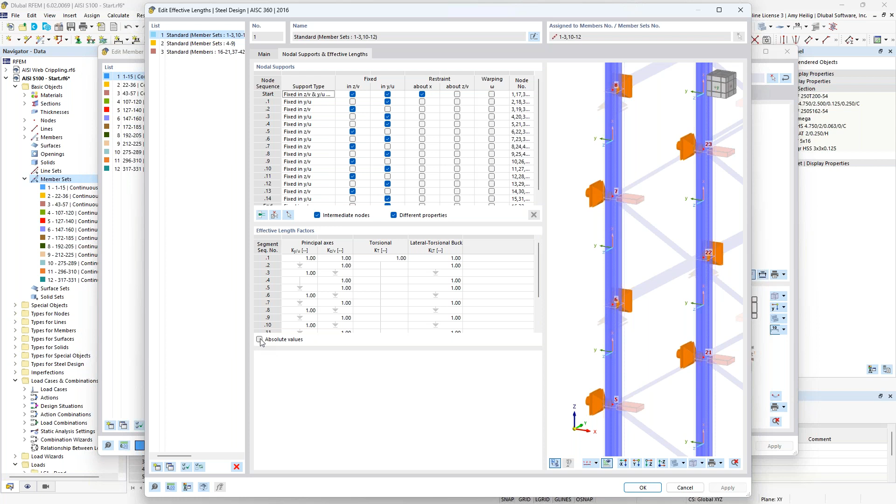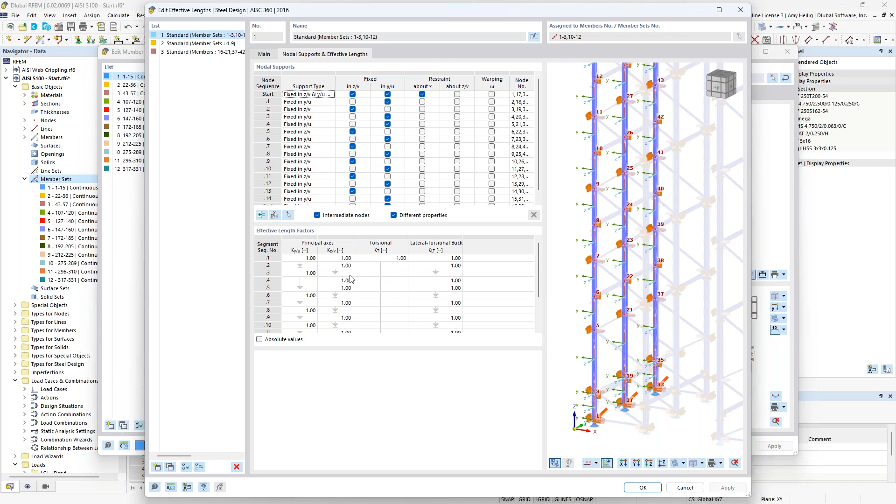And alternatively, if you have absolutely no interest in inserting in all of these intermediate supports, you can check on the absolute values here and directly input KL for each of these failure modes. And the downside to this is that if the model has any changes, maybe nodal location, we modify these slightly. If we use these options up at the top, everything will be automatically updated for our unbraced lengths. Alternatively, if we override these, we would need to come in and manually modify them, but that's certainly an option that you can take advantage of.

Also, under the design supports and deflection, you can see here that I have assigned specific design supports depending if the member is supported in the strong or weak axis direction. And these are applied all along the member length because I really don't want to reference the full column height for my limiting deflection ratio, but rather I want to reference the L, or the length, in between these intermediate supports. And we do so with the design supports. And notice that all of these intermediate nodes were directly detected within the program.

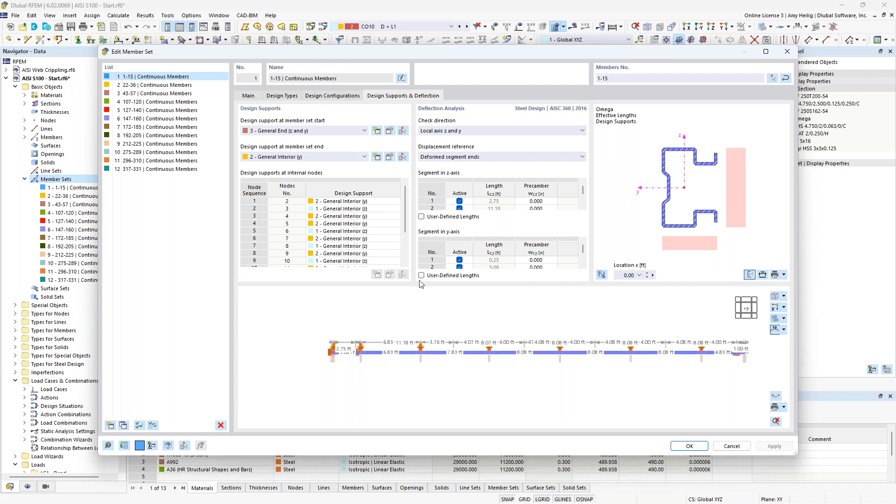Okay, so now that we have this information defined, such as unbraced lengths, we'll go ahead and exit out back to the program. And we want to jump down here to the steel design add-on. And you'll notice under this first tab, we have our design situation. So I had mentioned that if we carry out the design, we have to use these design situations. And the reason why is we see our first LRFD design situation that we are going to relate in the second drop down here to the strength limit state according to LRFD design. I'm using my second design situation, ASD, and I'm relating this to serviceability.

Now, alternatively, if we were carrying out ASD design, then maybe we would turn off altogether LRFD. We would set our strength limit state according to ASD for our ASD design situation. We can make an additional copy of this design situation for serviceability as well, or we could create our own custom design situation for serviceability. Again, for our example today, we'll go ahead and carry out LRFD design.

Under the second tab are the objects to design. Now you'll notice that defaults to designing all members and all member sets, but we have many members that are given to us over here in this column in red, and that's because they don't have an effective length defined. So the program won't be able to design them, of course. So rather than designing all members, let us go ahead and graphically select here by clearing out this entry, and I'll turn on only my HSS sections so that I can graphically select these. The member numbers are automatically input here.

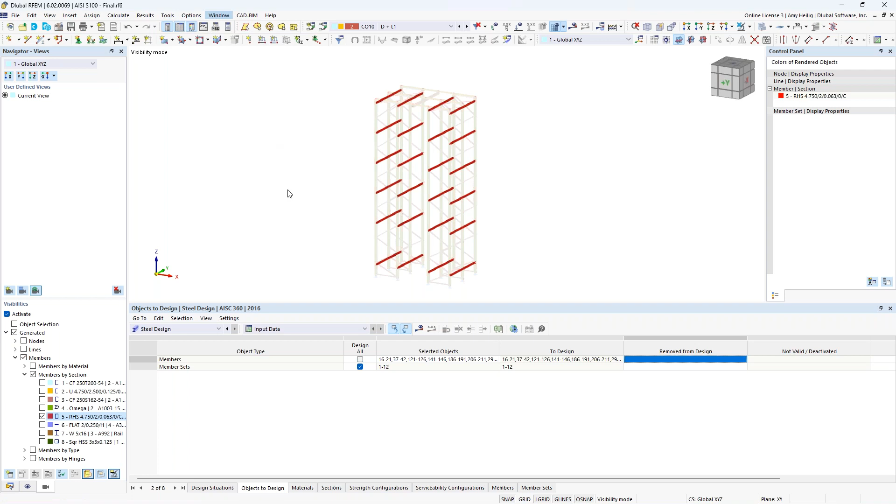And now we're ready to carry out the design for this simple example only for my rectangular sections, but also for all of those member sets or each of those columns. So we go to calculate all. Now, because of the finite strip method, remember for all of these individual cross sections, the calculation time does take a few minutes. So rather than waiting for that, we will jump to an already saved model here with our results. So once the calculation is done, we are currently looking at the steel design add-on, but we now have available to us the design ratios on the members.

And we could view these design ratios in the table format here for each individual member. And you'll notice that as I click within this table, the program will automatically sync here in the graphical view to show me exactly which particular member I'm looking at. That red arrow is showing me for that particular check exactly what's controlling. But maybe we look at the design ratios by the cross section because I've only designed 2 cross sections for today. We have here our custom cross section from our section that we brought into the program, as well as our rectangular hollow section here.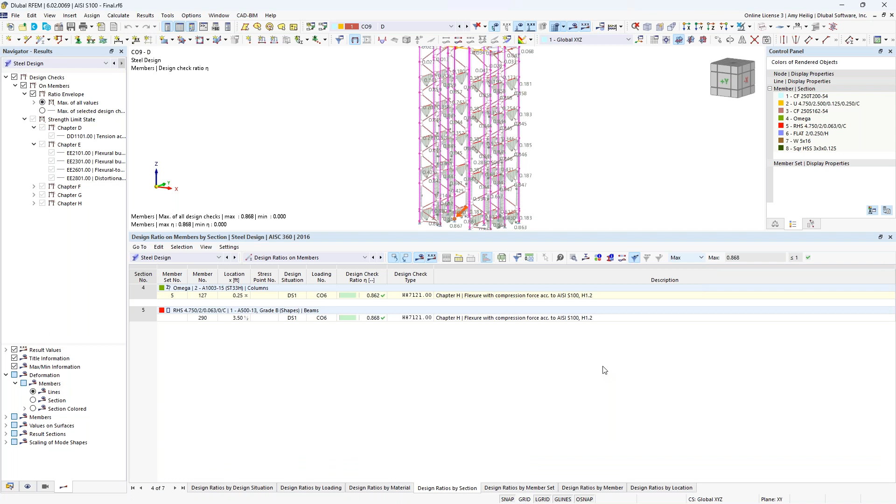And you'll notice that we are checking every single chapter here for our strength design, as well as serviceability, referencing each chapter. Now, if you're only interested in the max design ratio, we could always use our filter here to select the max. And now we see just the controlling design ratio for this particular cross section. And for these individual checks for each chapter, we can access what we call the design check details.

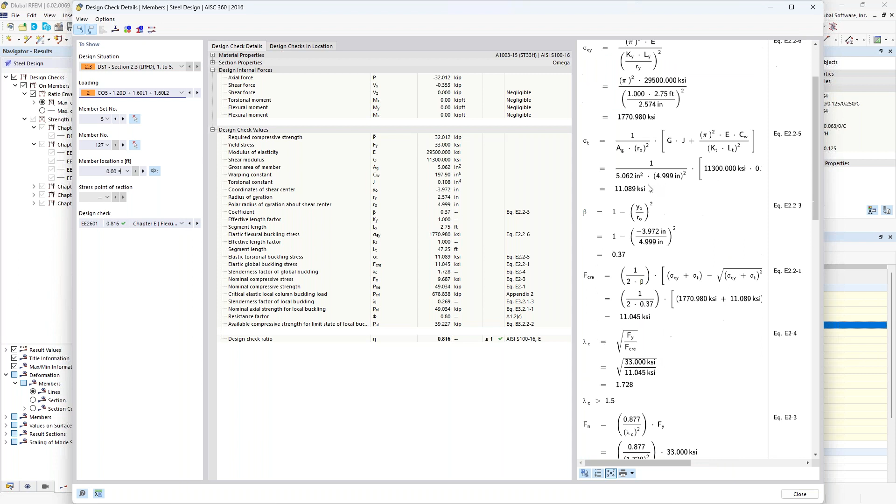So this is new within RFEM 6, that for all of these code calculations, you'll notice here that we list the formulas line by line. We have all references to the AISI standard, and we have all the variables also listed out here, and ultimately how we are calculating this design ratio. So trying to be as transparent with this information as possible so that you can follow along with your own hand calculations to ensure that you agree with the program's output.

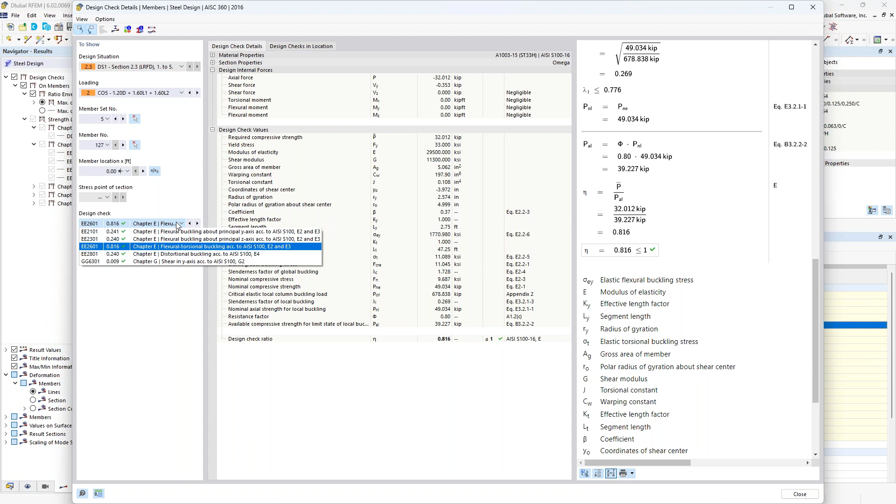We can print this to our printout report. What's nice is that if we do this and we make any model changes, we rerun the design, the picture of these calculations will automatically update as well. We can jump down to any different particular check here to view the various formulas for chapter E, for example. Also within this dialog box, we can access what's called the diagram in section.

So now that we have viewed this information in table format, notice that over on the left under the steel design, we can turn on and off the various design ratios shown graphically here. Currently, we're viewing just the overall max ratio envelope, but you'll notice under these options, we can individually select the different checks.

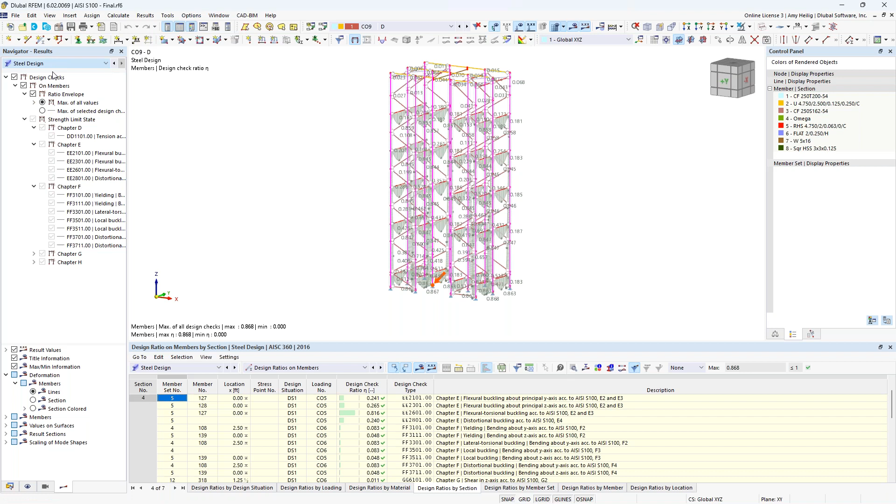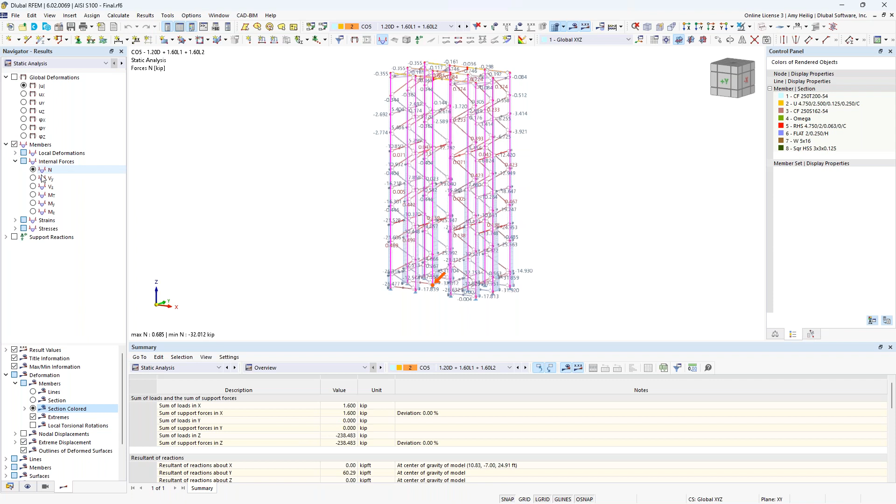So backing up a step, if we also use our drop down here to take a look at the static analysis. So we're currently viewing any one of these load combinations, and this was the static analysis carried out directly within RFEM. So we can view the global deformations, for example, and perhaps I change my deformation display to colored cross sections. We can also view the member internal forces. So we can view the axial forces or the shear forces, bending moments.

If we zoom in here, we can right click on one of these members and access what we call the results diagram. And you can do so with individual members or groups of members. This will allow you to turn on these internal forces or deflections and view in a bit more detail what's going on along the member length.

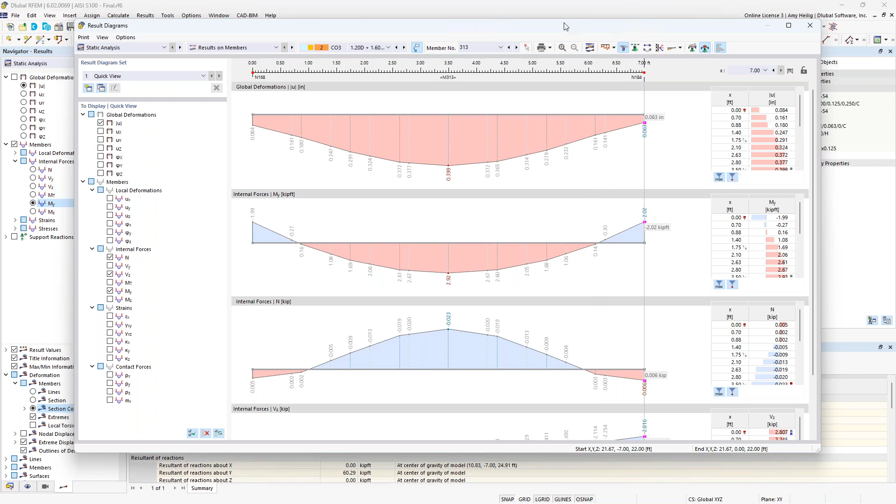We can switch to a different load combination here. We can add this information to the printout report. We can smooth, we can average out these forces. So quite a bit of information here that we otherwise wouldn't be able to do graphically. And you can slide this over to your second monitor and work concurrently in the program.

So in addition to the graphical output, we also have our table output for the static analysis, where we can view the results by member, such as the internal forces. We can export this information to Microsoft Excel with the click of a button up here for further sorting capabilities.

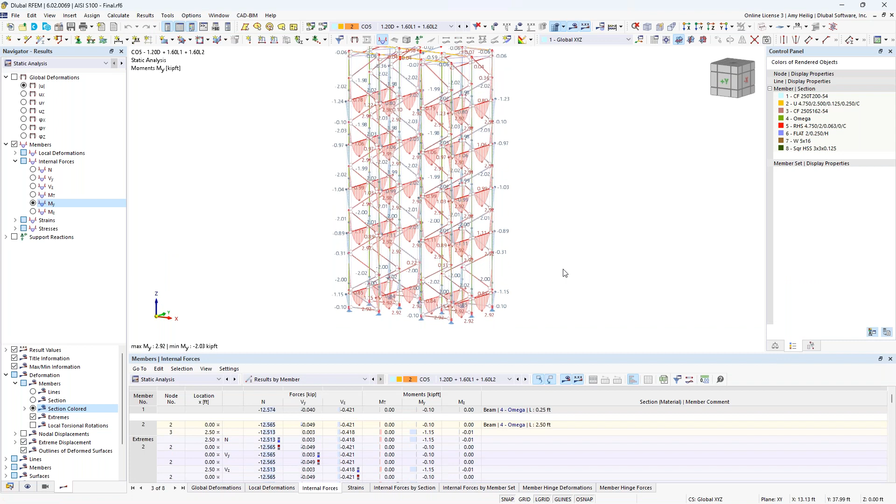So hopefully this just gives us a nice overview then of the full analysis and design workflow for these cold-formed steel sections according to the AISI. As we know, identical workflow for the CSA S136.

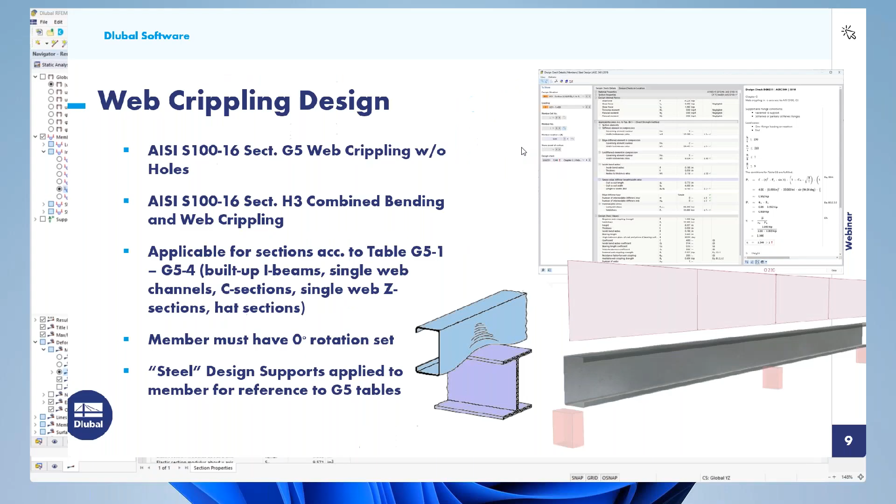So in the final few minutes here, I do want to turn to a topic that is maybe a little bit more unique for an FEA program. And this is web crippling design. So typically in a lot of FEA programs, we just simply can't account for these additional checks. But within RFEM, we actually have integrated these. So we can carry out the design of web crippling according to section G5, and this is web crippling without holes, as well as section H3, which is combined bending and web crippling.

Now, this is only applicable for sections that are referenced directly within the standard, in particular table G5-1 through 4. And those sections are listed here. So any other cross section outside of this list, we won't be able to check web crippling, so you would need to manually take that into consideration. Another requirement is that the member must have 0 rotation set. So we can't rotate this member 90 degrees or 180 degrees. We need to leave it at 0 if we do want to carry out these additional checks.

And finally, the last requirement is that we have to apply what we call the steel design supports. And this will allow us to directly reference these tables from G5 in order to carry out the full web crippling calculations. Now, we've already talked about design supports within our example model today that we use for deflection.

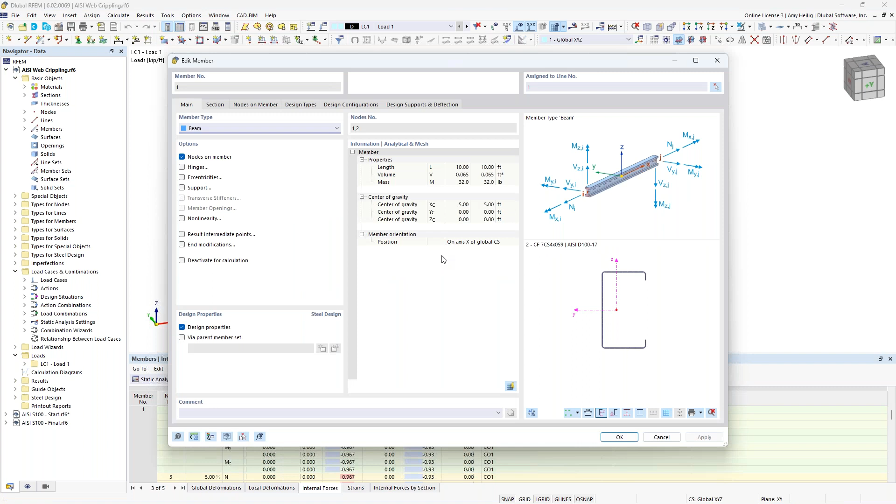Well, if I double click on this section, everything is as we've already learned from our previous example, except for let's take a look at the design supports. So you'll see here that I have already defined supports at the 2 ends as well as the interior with that automatically detected node, but we do need to create the design support definitions.

So you can see the first one, I have labeled this as the end support, and the type in this dropdown is set to steel. If we have this set to general, we'll only consider these design supports for deflection. But when we have it set to steel, this will allow us to further carry out not only the deflection checks, but also the web crippling.

So you'll see that I do need to give it a support width. So we enter in the support width. For my end support, I set this at 3 inches. We need to tell the program if it's an end support, if it has an overhang length, and also is that support fastened to the member. And this information is all important to reference to chapter G5 from the AISI. Without it, we wouldn't know what variables such as safety factors, resistance factors, coefficients to reference without directly inputting it in here.

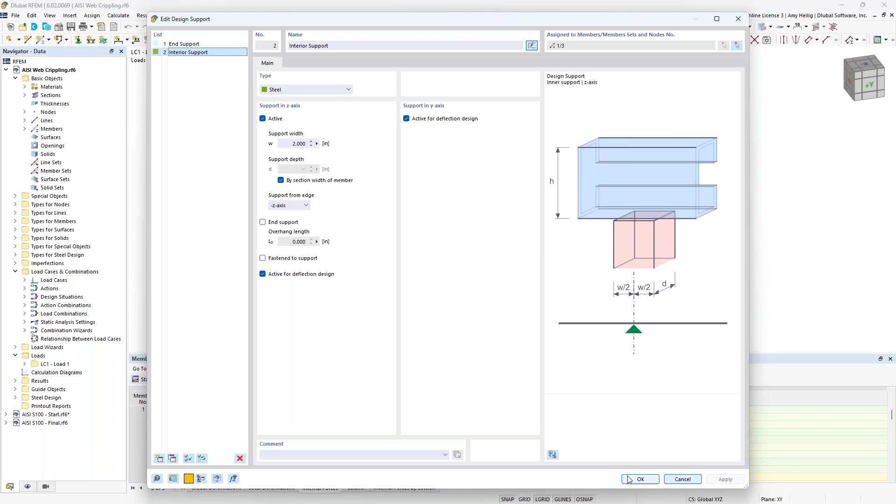Now I also have a second definition for my interior support. So if these supports vary, that's no problem. We just create a second definition type here. The type is set to steel. My support width was decreased to 2 inches. It's not an end support, and maybe it's not fastened to the member. So once we have the definition set, then we just simply use our drop-down box to assign them to the nodes along the length of the member.

So once this is input, we can take a look here at our steel design results. And you can see that my design ratios here, except for these ones shown in red, are very low. We have 0.304 or lower for this particular cross-section design according to the AISI. These two checks that are over the 1.0 ratio are specific to web crippling.

So you can see how maybe perhaps if we forgot to carry this out, the member looks like it's passing quite well. But when we add in these additional web crippling checks, we see that actually the member is not adequate. Again, web crippling according to G5, as well as combined bending and web crippling according to H3.

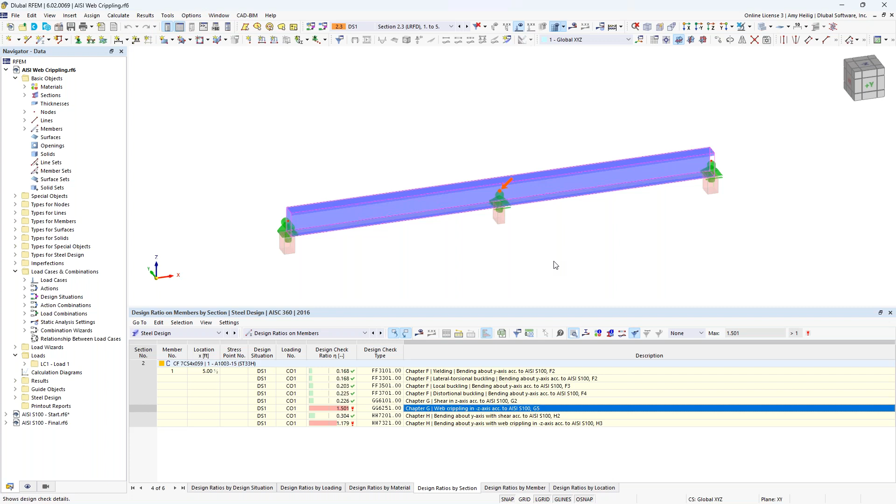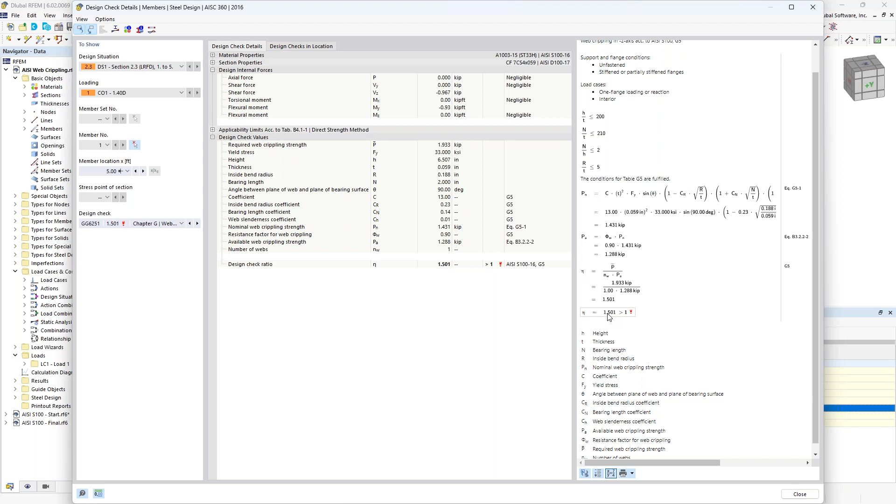We can pull open the design check details here, and we can see all of the information where we will reference those tables in G5. We list them out here in table format as well, and ultimately how we're calculating that design ratio for web crippling. So just an added benefit here of RFEM, again, that many FEA programs can't consider, but because we have those specific steel design supports, we can carry out this additional check.